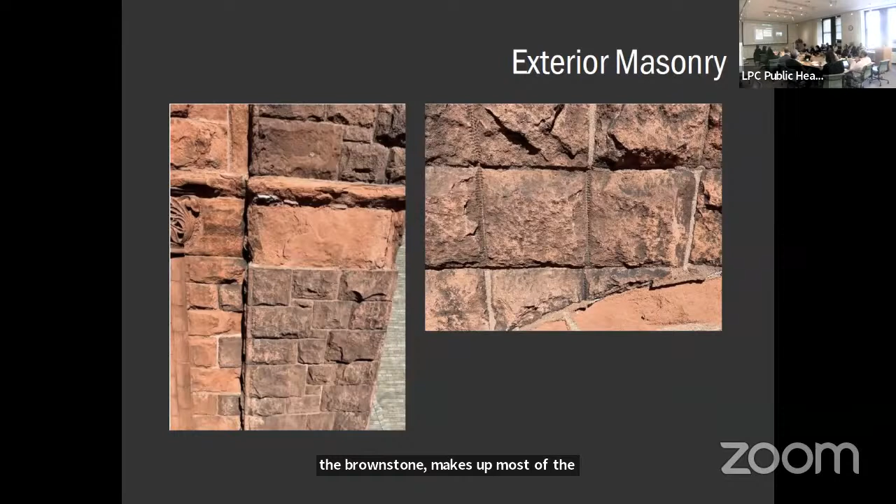The other stone is this redder stone that is used for the carved ornament areas, and it is much softer and has deteriorated quite badly in places. A good way of thinking of this is that the brown stone makes up most of the wall, but the red stone makes up most of the dangerous conditions. Next slide, please.

Thank you. These are pictures from the report by Facade Maintenance and Design, which is a member of the development team, showing a probe at the exterior wall. The Facade MD report states that the brownstone veneer is 4 to 5 inches thick. That's its minimum thickness, it is thicker in places. As you can see in the picture on the right, the stone there is 8 inches thick.

The probes show that there are occasional metal ties between the veneer and the backup. They are not everywhere. But I think it's important to note that there is no evidence and there has been no discussion of separation between the veneer and the backup. In other words, the wall is holding together reasonably well as a whole. What is happening is that the exterior of the brownstone is deteriorating and in some cases breaking off.

Next slide, please. You've seen this picture before, about 5 minutes ago. I want to draw your attention here. We have what's either a very large dormer or a very small cross gable on the south facade, and the triangular pediment portion of that wall is tilted outwards rather noticeably.

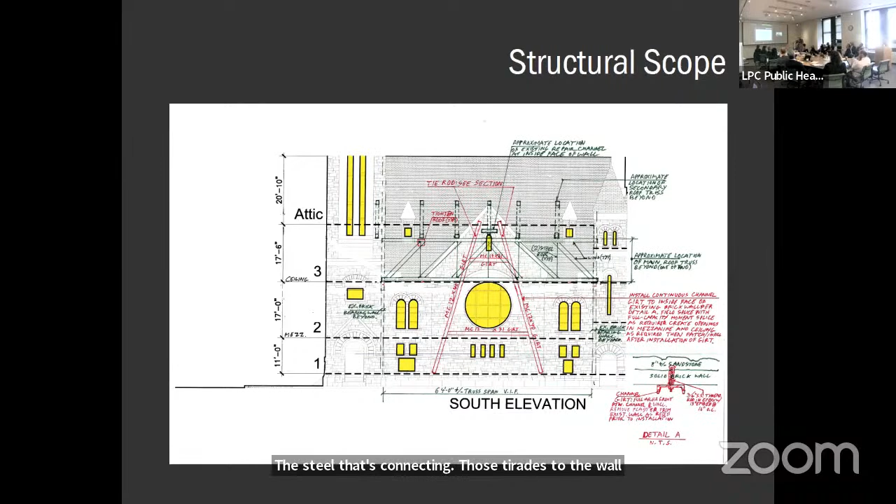Next slide, please. This is a cross section through the church. There's the gable truss, there's the lower truss. We've got tie rods up here and tie rods down here. I just want to make an important point: there's a discussion in the structural report that this wall is being pushed outwards because of the thrust of the main roof. But if you note, the main roof rafters come down at the bottom of that triangle—they can't possibly be exerting force up here.

More importantly, that rafter is supported here, here, and here. You get thrust in a gable roof when the rafters are only supported at a ridge board and at the eave—that's not the case here. There is no outward thrust under gravity load from those rafters. So the explanation for the gable and wall movement is not inherent in the structure of the roof; it's inherent in the lack of ties between the wall and the roof structure.

Just to continue on this for a second: the roof ties are up here, and these girts continue all the way down. The girts are channels laid flat against the wall. They are much less stiff than the wall is, so they are not going to do very much to restrain it. In short, the work below the eave, at what's called level 3 here, is not very effective.

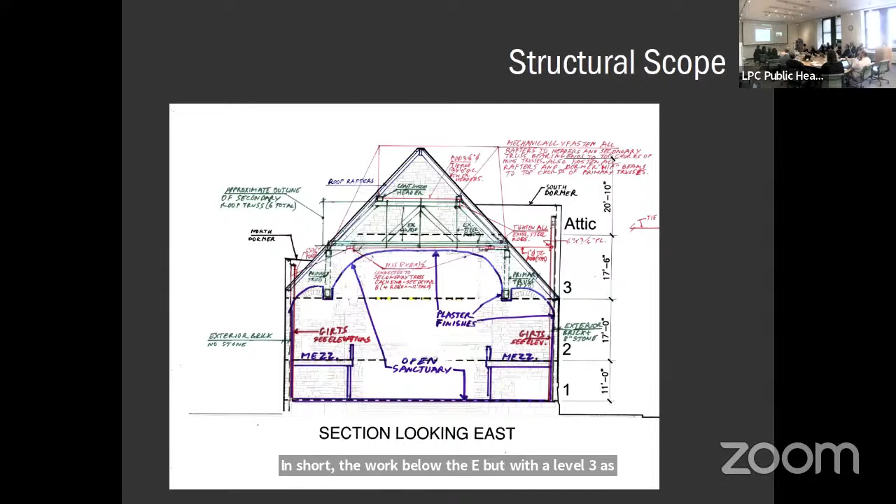Next slide, please. This is a very short summary of the scope of work that was priced, for which there's a long cost estimate. If you count the stones in the cost estimate, it appears all the damaged veneer stones are being replaced entirely. Pins are being put in to tie the veneer back to the brick—twice as frequent as required by code, though not required by code for a new wall, and not required at all in this case unless there is damage, because the building is grandfathered in its current state. If there were separation between the veneer and the backup, they would obviously be called for.

As I've just discussed, we have two sets of steel ties running across the building, including those steel girts that run from the first floor all the way up to the top of the roof. I didn't discuss this in detail, but there is full restoration of all the art glass windows, which is most of the windows in the building. That is the scope of work priced out in the April 2023 documents that I reviewed. Next slide, please.

So what I've done for the alternate scope of work, and I did this specifically to look at the cost, is what work is necessary to make the building safe today and for a 5 to 10 year horizon, knowing that more work will have to be done. If you spend more work today, you will reduce the amount needed in 10 years, but you will not eliminate it. So right now, the question is, how do we make the building safe?

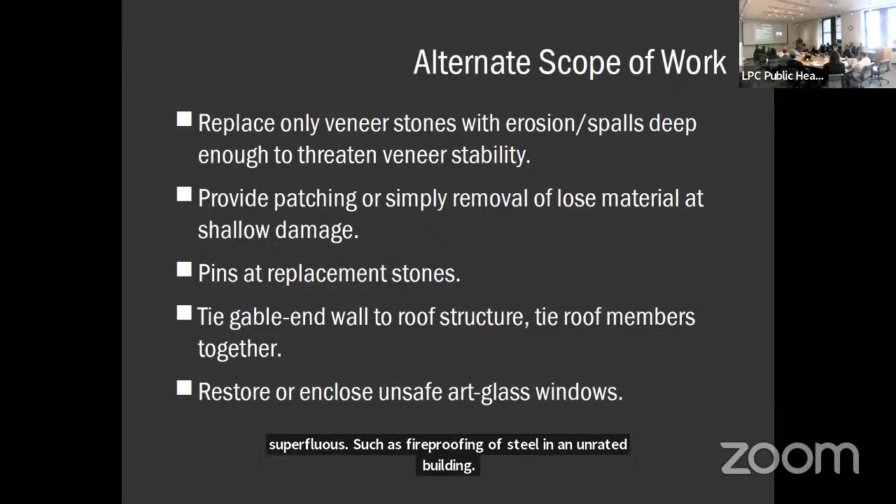In my analysis of the structural work, I kept the scope of work as shown in those 2 sketches a few slides back. I removed items that appear to be superfluous, such as fireproofing of steel in an unrated building. If you were to tie the wall to the roof and tie the wood members of the roof together with light gauge steel connectors that are used in wood construction today, you could eliminate most of the structural work as currently shown. I believe the cost, simply in eliminating the superfluous work in the structural portion, the cost dropped by about 50%. If you were to go to a more carefully designed repair, I believe you could reduce that by another 50%.

Looking at the report on the art glass, most of the windows are not unsafe. However, the scope that was priced was full restoration of all of them, including double glazing. If you were to change that to simply restoring or putting a storm window in front of the windows that are currently unsafe, you could again greatly reduce that scope.

One last comment about the existing Department of Buildings violations. They do not say this stone is unsafe. DOB violations don't work that way, as I suspect you all know. So part of doing repair in a building like this is to say to the building department, here are the unsafe conditions we intend to address, and here is our plan for future work, rather than here's a plan to do everything today. Thank you.

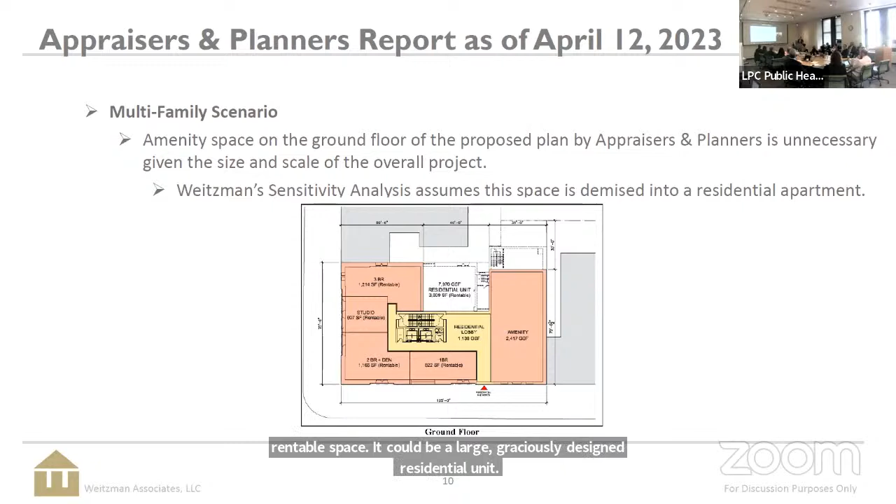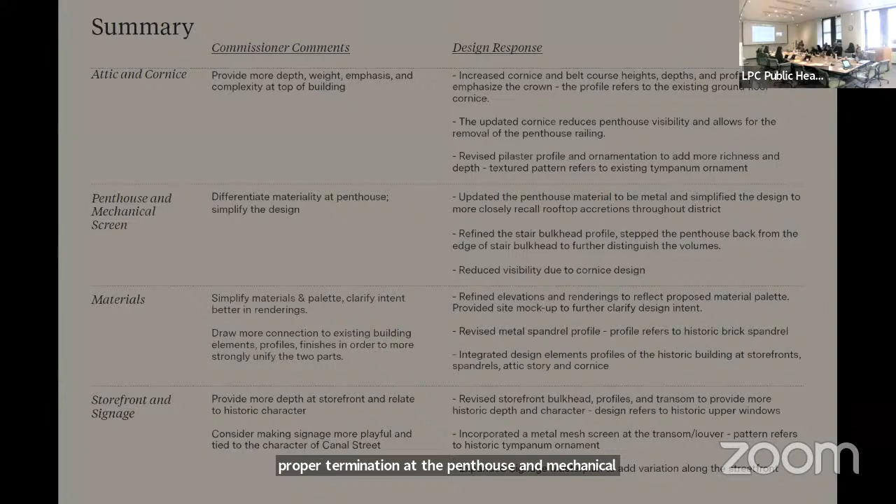So here we have just a summary of your comments that we heard at the hearing. We also have our specific design responses. But in general, what we're talking about today are the attic and cornice level. You thought there was a need for more depth and articulation and emphasis of the crown to give it a proper termination. At the penthouse and mechanical screen, you wanted the design to be differentiated from the base building and to simplify the design more in keeping with typical rooftop accretions in the district.

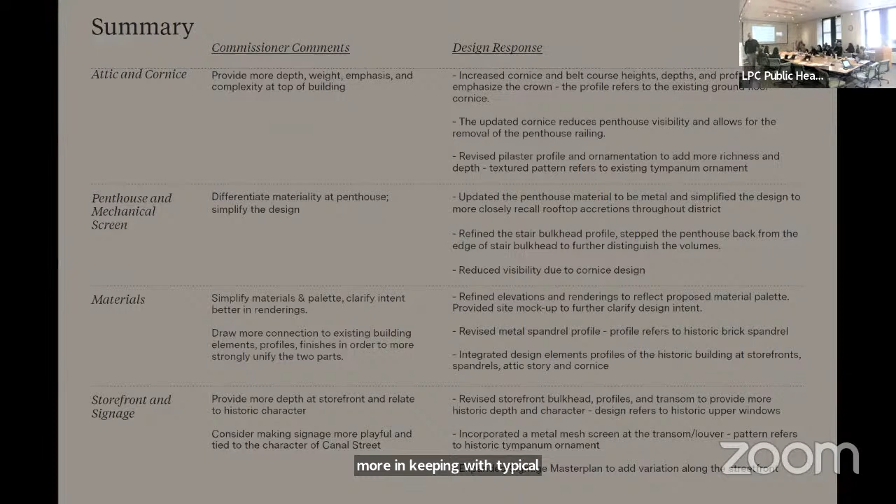In terms of materials, you asked that we simplify the palette and make more of a connection to the historic building itself in profiles, materials, and overall palette to unify the two parts. And then finally, in terms of signage and the storefront, you wanted something that related in terms of storefront infill that resonated more with the historic character of the building. And then also in terms of signage, something perhaps a bit more playful and reflective of the character of Canal Street. We've of course responded in words, but maybe the best place to see it is in elevation.

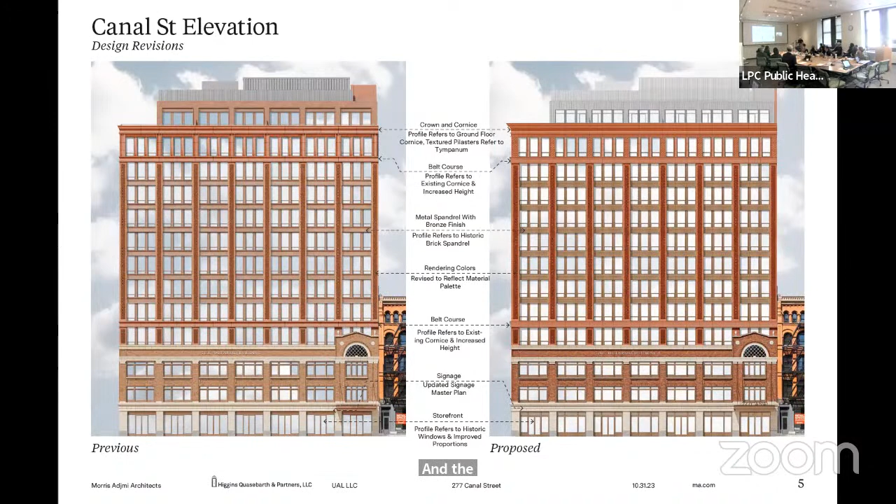The storefront and the signage was also changed and enhanced. So if we start here, this is a Canal Street elevation.

You can see that the cornice was almost doubled in size. It went from about 3'10" to 6'7", I believe. That encompassed the handrail with further articulation, and it also extends 3 feet from the face of the building. Before it was about a foot. And the belt course below the attic story extends a foot, which was what the previous cornice extended.

One thing I should have pointed out is that there's an existing arched opening with a lattice pattern, the diamond pattern that you see in the tympanum on Canal Street. We used that originally to inspire the sawtooth brick pattern, but that's extended to the terracotta pilasters at the attic story as well, and that really ties all of those elements together.

Also, just want to note that the spandrel panels, which were sort of a channel, more industrial, now directly relate to the spandrel panels in brick, although in metal, relate to the proportions and the size of the spandrel panels on the existing building in brick.

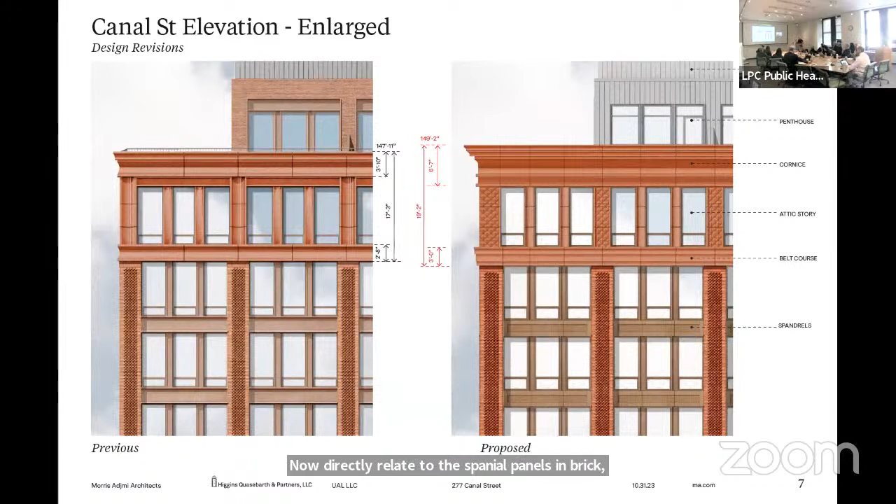Next slide, please. Here, just more detail on the drawings. You can see the cornice extending 3 feet from the face of the building, and the previous was a foot, and also the overall height was just under 6'7". And then the belt course, we added 6 inches to that, and also increased the depth of that.

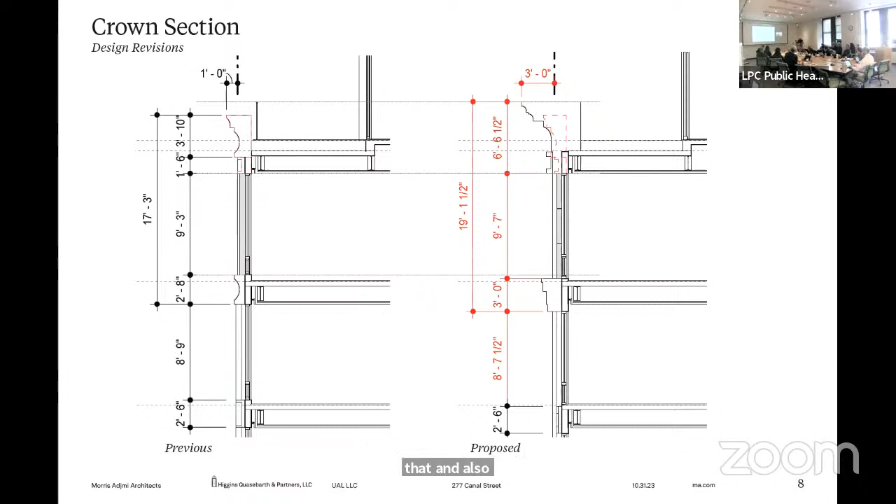And so here from the corner, you can really see the effect of the overall attic, specifically how it's really the appropriate size now for the entire ensemble of components and the termination for the building. Additionally, it helps to shield some of the visibility of the penthouse, depending on the position. And you see all the elements here, the nail head or diamond pattern on the terracotta pilasters at the attic story, as well as the sawtooth brick pattern below.

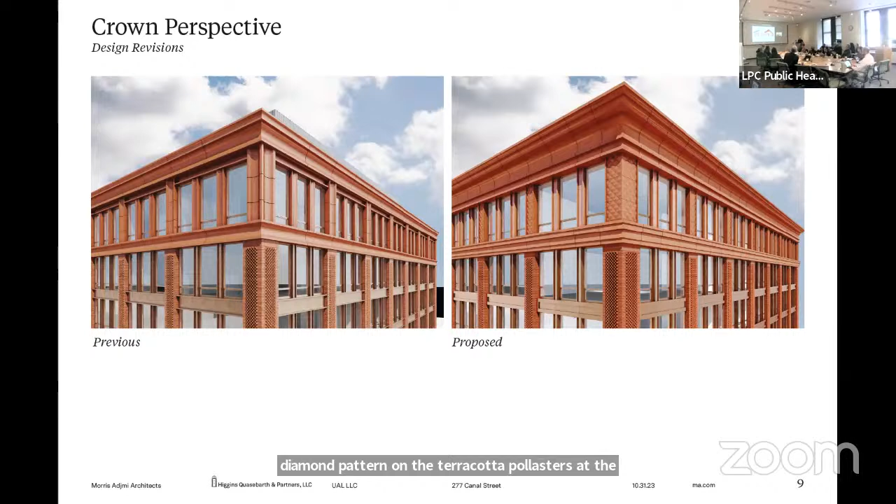Next slide, please. Here, just more dimensions. I don't think we need to go through those, but on the mechanical screen, we're asked to look at reducing and simplifying the materials, to make it more in keeping with some of the rooftop accretions that you see in the district and the neighborhood in general, which we've done.

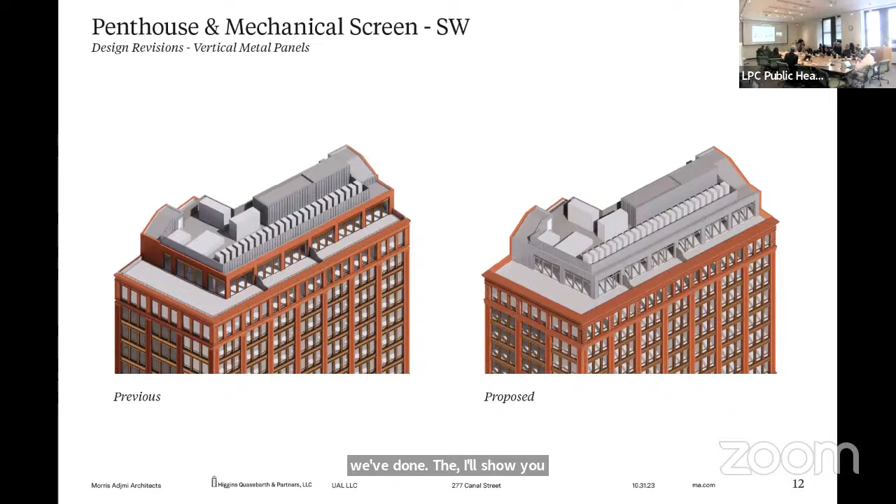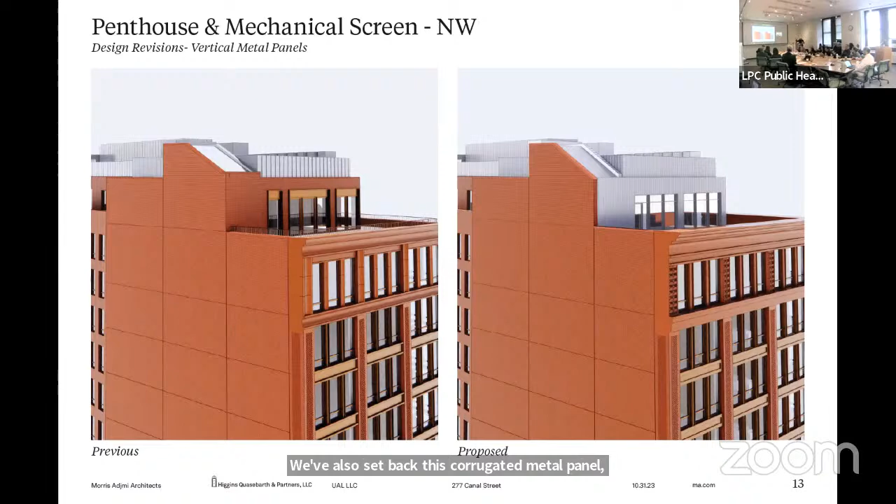I'll show you some of the detailing in the next slides. So here you can see the brick wall extends as many of the existing buildings in the district. We've also set back this corrugated metal panel, simplified some of the detailing on the top of the building as well, and the fenestration panel pattern is also simplified.

And you see the end wall there extending up and the material change. I think this is also a good view just to see the effect of the attic story, the enhancement of the cornice and the belt course, as well as just the taller story there really helps terminate the building. And you'll see it in the next image.

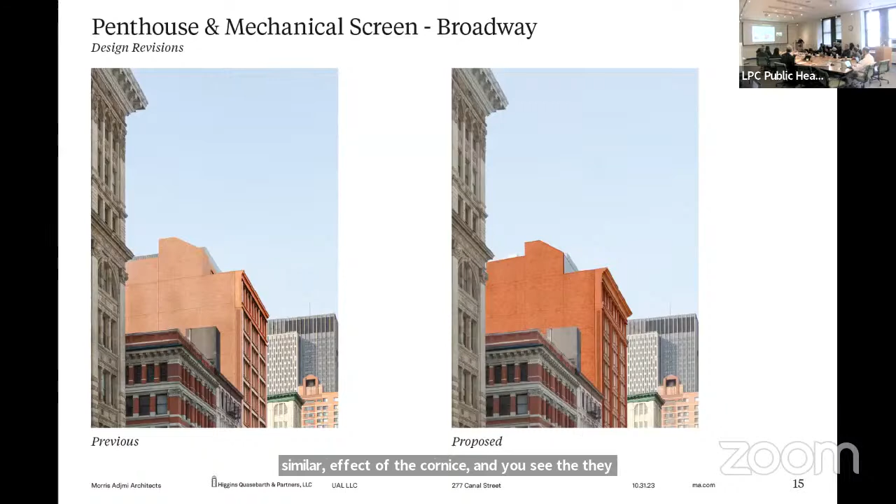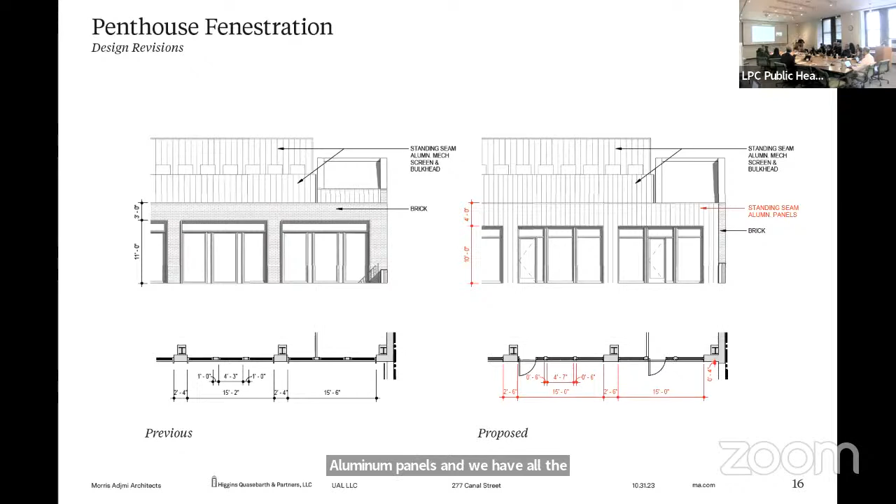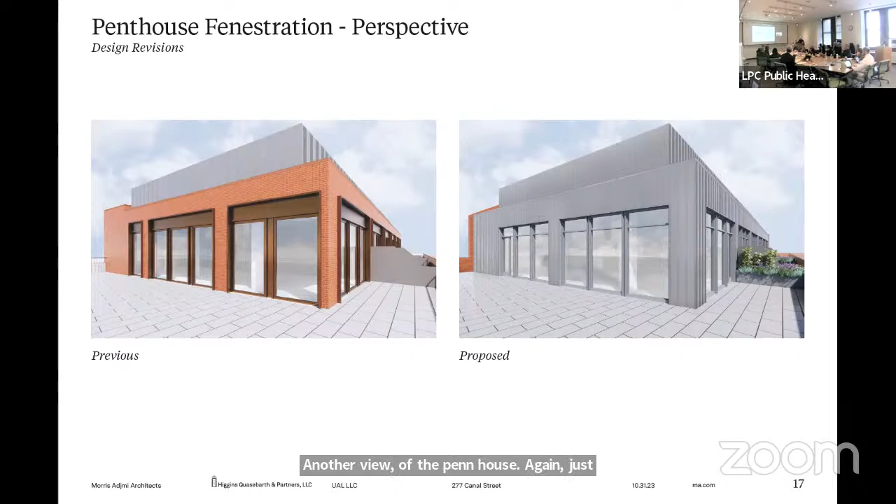Another view of the penthouse, again just simplifying the details there. In terms of the materials, we were asked to look at the brick to tie it in to the existing brick pattern.

We also did a mock-up on site. In the previously proposed material for the brick, it was more monochromatic. We've found a brick that has a little bit of a range, but we want that still to read as monolithic material so that the pattern of the brick and the detailing of the elements are more pronounced with the shadow. And that's the existing on the left.

And then the next slide shows all the materials for the existing building on the left and the proposed on the right, which is the brick with a slight variation, the terracotta and the bronze toned aluminum with the lighter aluminum for the penthouse.

Here's a mock-up. It was a little difficult to get a good shot of this, but the brick really drew on the colors, with the exception of the black, the range of reds that you see on the existing building. And we've updated the renderings to show that. Next, the storefront.

We were asked to enhance the details and look at the bulkhead, and we've done that. We've changed the profiles of the storefront. We introduced a mesh screen to hide the louver behind it, which recalls the diamond pattern you see in the lattice on the arched opening above. We have a few additional slides of the storefront.

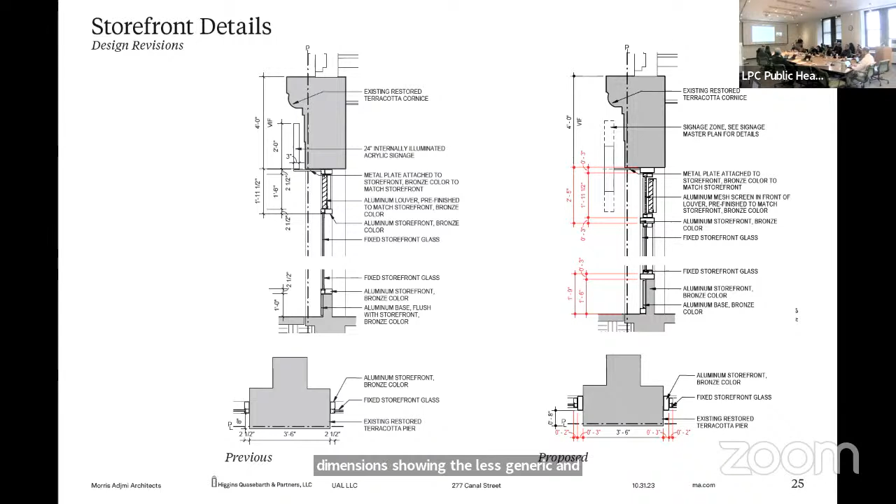Here are some of the dimensions showing the less generic and more nuanced profiles for the storefront, and a render showing the effect of those changes.

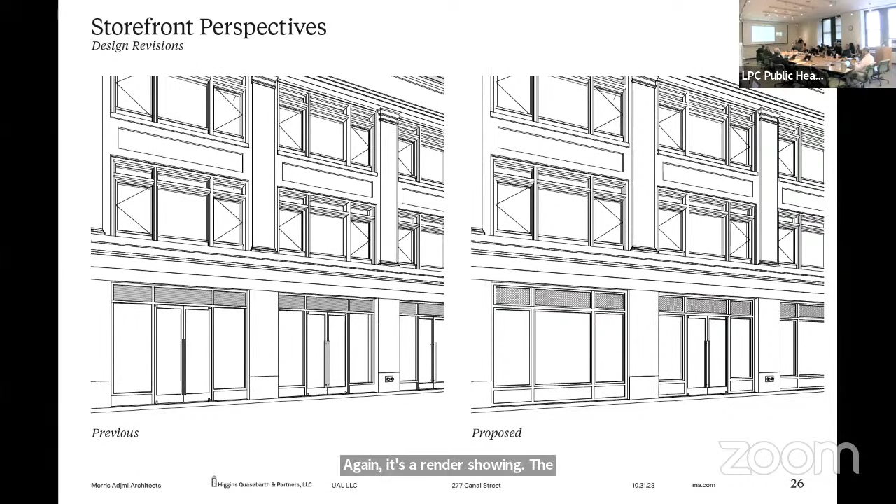Aaron, do you want to talk about the signage? Next, please. Yeah, thank you.

As I mentioned, when we first presented the project to you in June, we had a rather typical or standard storefront signage program, and your comments were that you wanted something more reflective of the context. So we have worked hard to try to land on something - it's very hard to codify variety. We'll run through this.

We see a sort of layered approach, both at the storefront and at the building scale, advertising to the pedestrian level but also the vehicular level. As we know, Canal Street is a major interborough, interstate thoroughfare, so we get lots of vehicular and pedestrian traffic, and we'll see some of that in this context. Next slide.

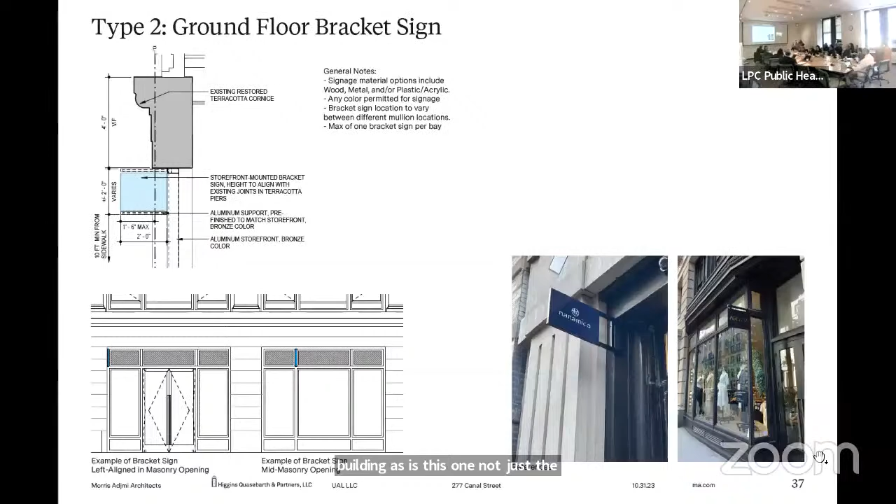Interior storefront signage. This is illuminated or non-illuminated within any range behind the window, and that would comply with zoning, which allows for up to 8 square feet per establishment and up to 3 signs maximum. In addition to that, are LED screens.

The LED screens follow the new staff rules—they can occupy up to 50% of the glazing area. They need to be set back a minimum of 18 inches, and they can't occupy more than 75% of the width of the window. Next slide.

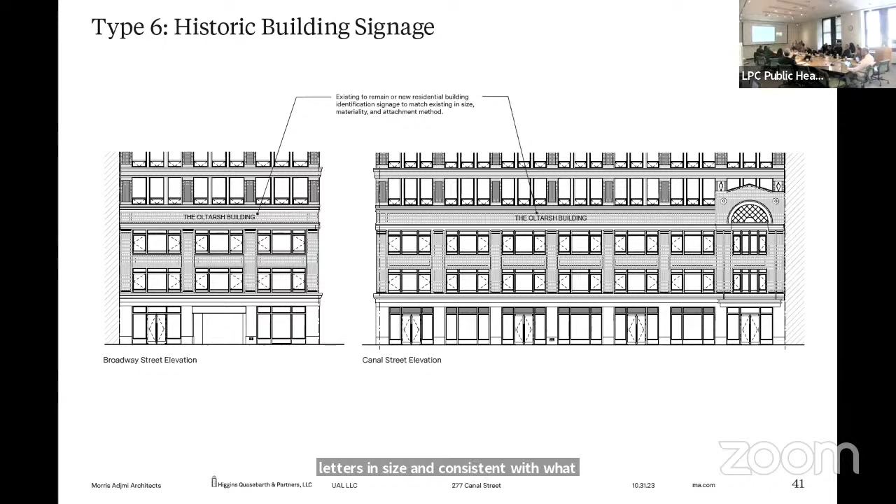Next slide. Oh good, we're done with signage. So we'll step back and just take a look at the building in context. I think these are the comparative elevations, which we've seen a few times already and gone through in detail.

Next slide. Here is the Broadway elevation. So all of those changes are consistent all the way around the building.

And I think Morris mentioned this, but this is where you start to really perceive the depth and articulation of the crown of the building, and feel how much more resonant it is with the depth of the historic facades. Next slide.

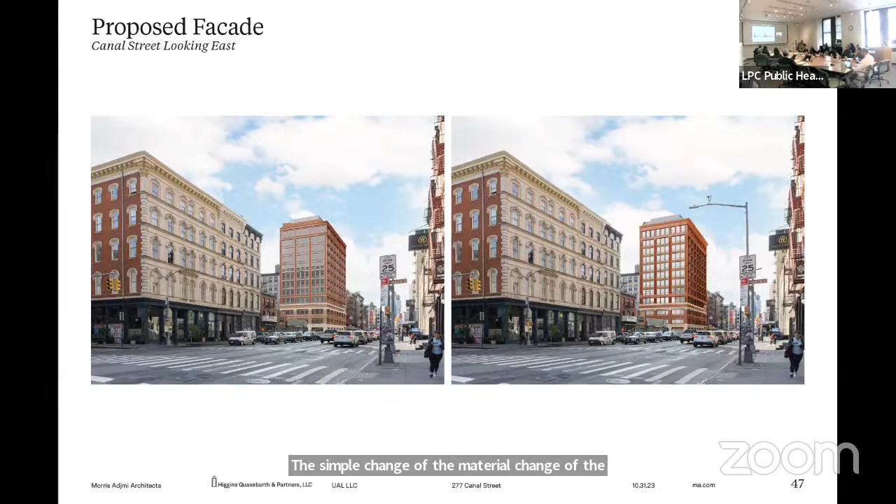This one, this is my favorite one. The simple change of the material change of the penthouse is so impactful here because you get the proper termination to the building. Here you see that the increase in the cornice height and profile really caps the building, and then allows the penthouse to recede in the distance.

And again, all the depth and articulation on the facades that you see as you're looking at the oblique. Next slide.

Thank you very much. Questions, commissioners? All right, I'm not seeing, yes, Vice Chair Bland. Unless I've gotten amnesia, I don't think I was here for the. You were not here. Okay, good, sure.

Thank you, very, very reassuring. My question is a very vague, broad one, and it's directed to Morris. But I noticed that it was also in the directive from the commission back to you at the end of the first one. Something about the whimsy, or I've forgotten the word, on Canal. This building is so un-Morris-like in that it doesn't bring us what you've accustomed us to expect from you, which is a level of whimsy or something that takes it away from the almost generic quality. Am I missing something in the details that you're going to surprise us with, or is this as generic as it looks?

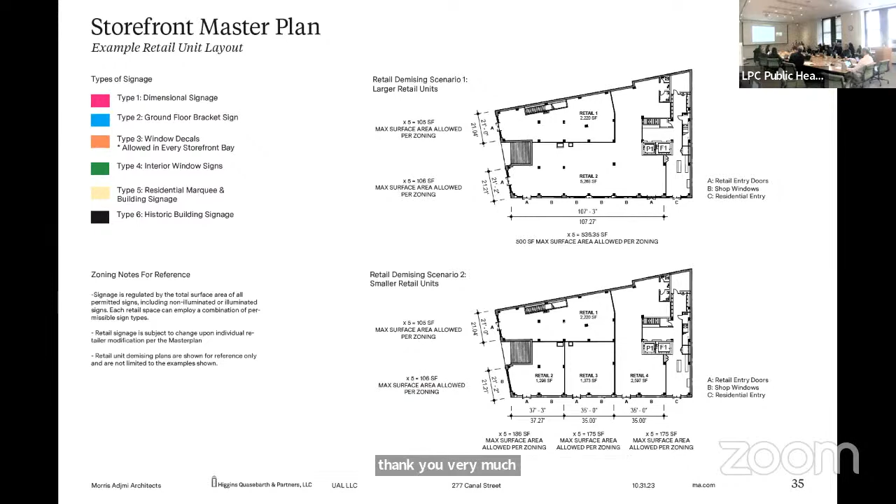Yeah, I was just looking at the rendering comparison from the previous to the proposed, and maybe I missed this, but the color of the brick is significantly different in your renderings - even on the existing building. I think we tried to more accurately reflect the colors of the materials, and it's coming up a little more saturated than when we actually did it.

So it's not that you're changing the brick on the existing facade? We're just cleaning the brick and repointing, not changing it, and it's reading a little redder than it is. At the same time, the one on the left reads a little too pale. Right, exactly. On this screen it's closer to the way it looks, but here it's reading a little off. Maybe we could flip to the sample to show the clean brick detail.

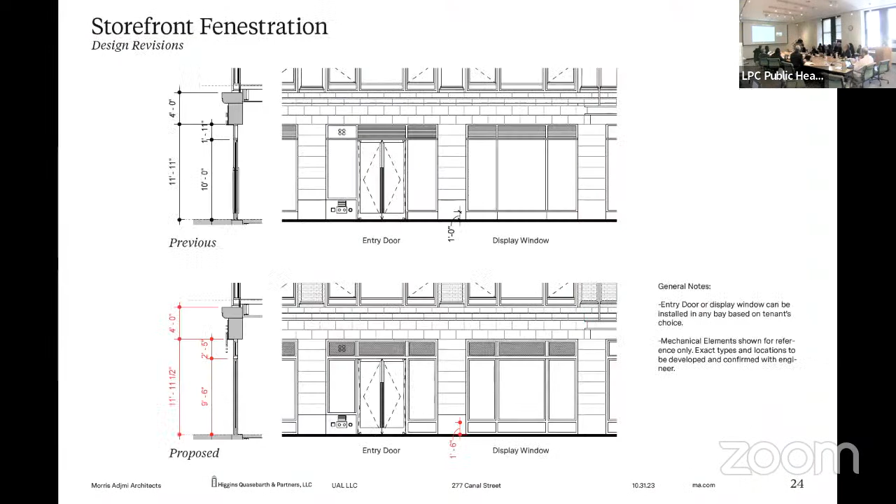Yeah, I was going to ask, did you clean a brick to look at it? We did. And does that match the sample on the table down there? The clean brick - this brick, that's the proposed brick, right, and there's a photograph. I think it's the next slide, right? Yeah.

And so we consciously didn't include the grays because we wanted to have that contrast, but we did draw on the range of reds in the base in the existing building. And this is, I would say, our intention. I think there needs to be a little bit more studying of the actual brick selection.

Can I ask something about the design intent? I think I agree with Commissioner Jefferson's comment that ultimately you've designed a very handsome, detailed facade, and it is a good fabric building - I think it's a handsome fabric building. Is it that the impact really will be the addition over the existing?

Yes. And from here, it looks like your intent is to make the addition feel more monolithic. Is that correct? Yes, yes. And that's the change in mortar that makes it more monolithic and less of a pattern. Right.

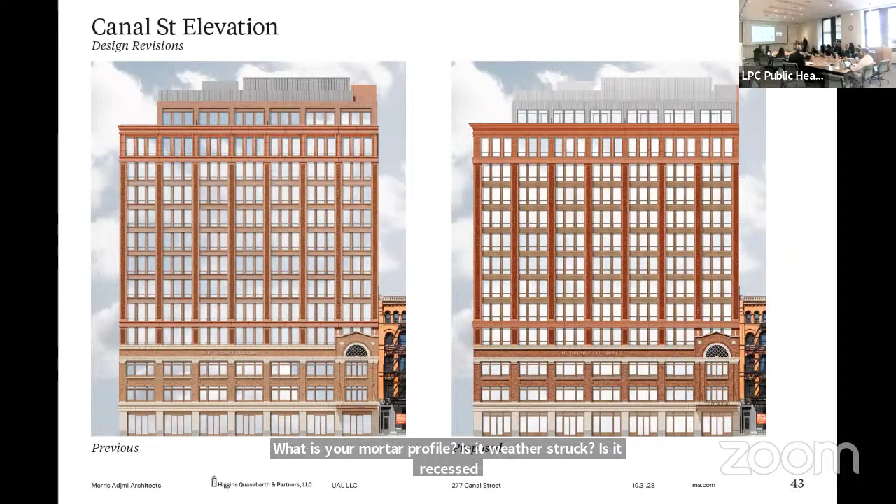Do you want the shadow? I think the shadow would help actually. Yeah, I think so.

And then the last question is about the signage. Essentially what you're proposing is expanding the possibilities of a tenant to put signage above and beyond the staff approval standards. That's correct, I think we were asked to be more exuberant with the signage at the last meeting. That was okay.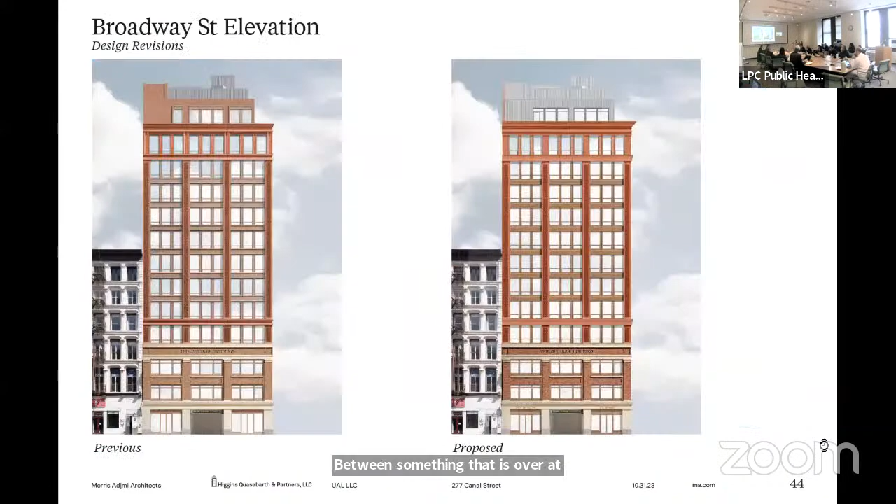What I do worry about, if you go back to page 21, the original mock-up is, as Morris said, on the line between something that is overtly intending to contrast and something that is overtly intending to extend the language of the building below it. And I guess I'm more of an absolutist than he is, but that's his right, and he's not wrong to be shooting for that target.

I worry very much that this particular palette is rather different from the renderings, in that the new palette, because of the mortar, not because of the brick color, I don't think, but because of the mortar and because of the trim colors, is going to feel like the intention was to do an additive building, where it's all kind of, the moldings are traditional, everything lines up, the fenestration. It just, as a mass and as a bulk and as a squinted design, as Morris said, from a distance, it really does feel like a single composition.

I just worry that when you get closer, it won't start to have the subtleties that he speaks about, but will feel like they swung and they missed on a match. That doesn't make me feel that it's inappropriate. I'm willing to give it a shot.

It's a big risk, but the safe solution would have been to just make the terracotta match the terracotta below, and to kind of seek to really blend it, do something with the grout that was more in line with the grout below. Because I think when you look at the building from even a reasonable distance, you're going to really see the variation in the grout considerably, and it's going to kind of change the overall feel of the building. I'm concerned about it, but I would still view it as appropriate.

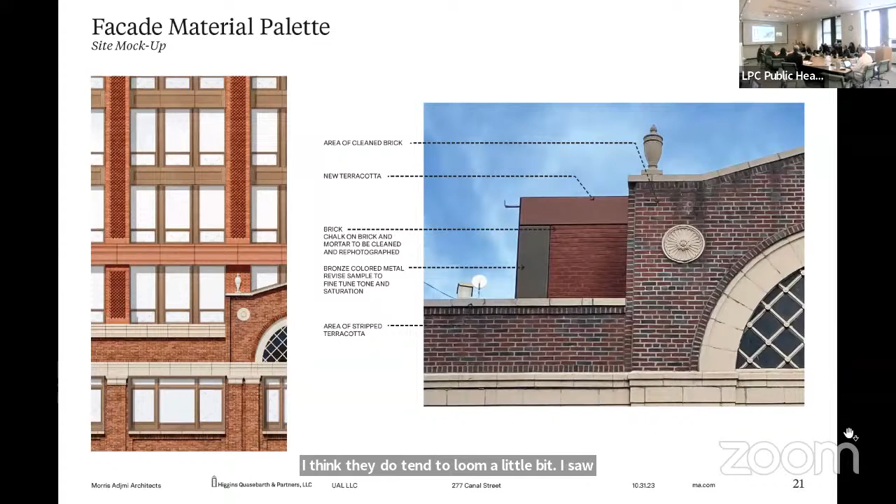All right, Commissioner Holford Smith, I think you also had very much the same comments, really talked about the attic floor being stronger and being a little more creative on the signage. You suggested the storefronts have stronger transoms and bulkheads, which they've incorporated. So how are your thoughts now?

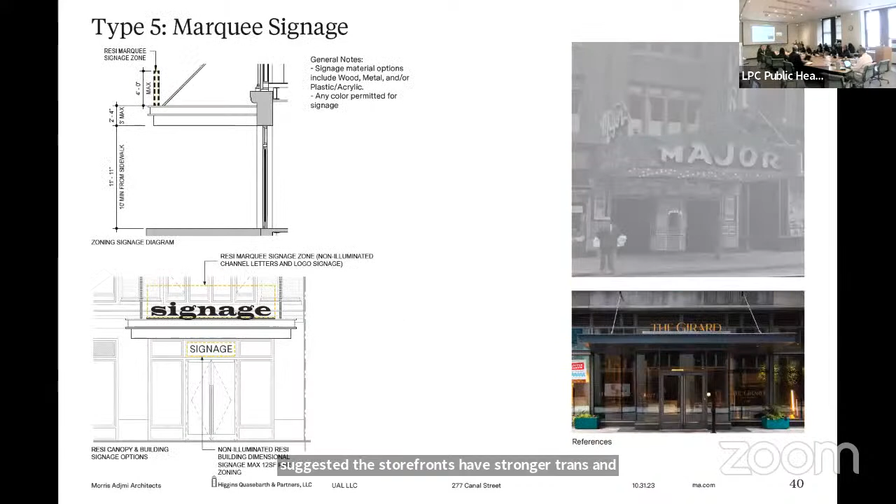I think all the changes are very positive. I think it's a much improved building. It was nice before, but I think it's much better now. I am persuaded by the signage that I think it'll self-regulate. I do share some of Michael's concern about the color of the brick and the monolithic aspect of it.

So I would just encourage them to keep looking at the brick and the mortar and maybe do some more mock-ups, because when you look at the original building, it goes a little more black and sort of dark maroon versus the sort of terracotta red of the brick. And as Michael was saying, you don't want to make it look like a mistake. So, either a common brick or using the same brick with a light mortar for the back facades, I think would be more appropriate.

Okay, great, thank you. All right, Commissioner Jefferson, I think you also were comfortable with the height. You specifically talked about simplifying the penthouse last time. I'm comfortable with all of it.

Okay, thank you. And Commissioner Master, you were largely supportive last time, including the signage on Canal Street. How are you feeling now? So I like the proposal. I like the cornice. I like the red.

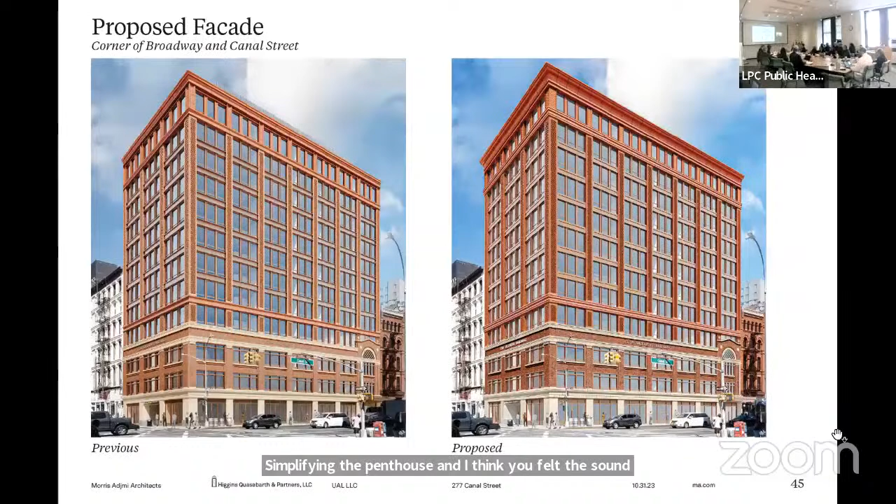Could we just go back to the other view of the building at the intersection? I'm sorry, Commissioner Lufty, could you speak into your mic? I just wanted to go back to the prior view where we were. Here? No, it was really at its full intersection. That's it. Thank you.

Because I want to just emphasize something I talked about a little bit last time, and that is, I was very supportive of the project then and I continue to be. But I want to first address the fact that I really think this is a very important nexus, as we discussed last time, and it's important that the building anchors this intersection, and I think it has very successfully done that in a way that also enables it to embrace the height that it has.

And I think it also marries from an architectural standpoint, not only what's going on Canal, but also what's coming south. So I appreciate that, and I appreciate, as part of that, the desire to look at what was pre-existing.

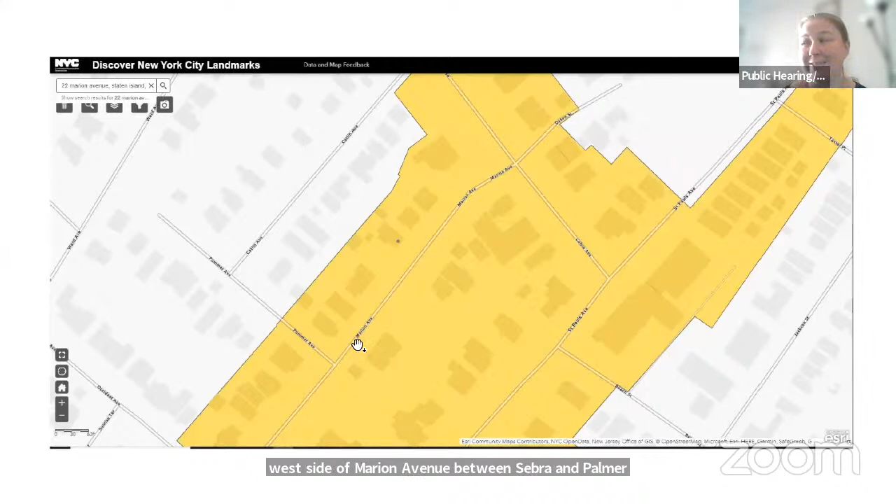Good morning, good afternoon, Commissioners. Abby Hurlbut, Preservation Staff. This application is for work at 22 Marion Avenue, located on the west side of Marion Avenue between Cebra and Palmer Avenues in the St. Paul's Avenue, Stapleton Heights Historic District in Staten Island. I'm going to briefly describe the proposal before handing it off to the homeowners to discuss in further detail.

The designation report describes this building as a Greek Revival style house with later alterations that was actually moved to this site circa 1886 to 87, during the rapid growth of the district at that time. It's believed that this Queen Anne style porch was likely added at that time the house was moved.

The proposal before you today is to install fiber cement board siding, also known as Hardie board, on all facades over the existing wood siding, and replace the wood trim with composite trim. The proposal consists of installing plywood sheathing on top of the existing wood siding to remain, followed by an insulation wrap and any required flashing at the openings, and finally the Hardie board lap siding. As a result, the plane of the new siding will be proud of the existing siding by just shy of 1 inch.

The window casings and lintels are proposed to be the composite AZEK material, while the historic wood fascia, brackets at the cornice at the top of the building, as well as the porch, will be repaired and retained in their existing locations. Now the homeowners are here to take you through the existing conditions and discuss the proposal in further detail. Make sure you state your name for the record, Tyla.

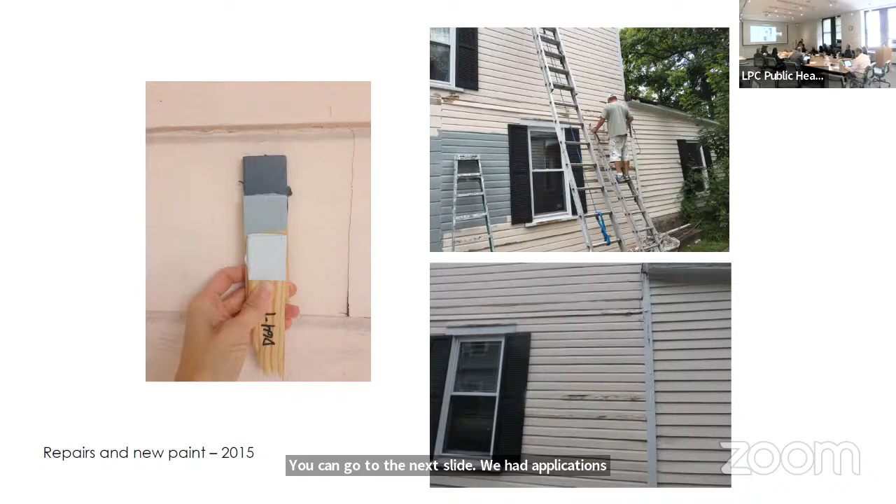We had applications submitted to paint and make some repairs in 2015, update the color, sand and stain our front porch, which we did a lot ourselves, which was fun. We put in an application and we're permitted for the new front door, which we kind of love.

And we're surviving here. I had another baby in the meantime. And just started dealing with interior issues and water issues. We kind of had a million different contractors come through in the past 9 years. Everybody has ideas for what to do. Everyone wants so much money. And we kind of were thinking, how do we do this? How do we maintain it? What do we do for the fixes?

We are dealing with a lot of different sides of different patches over the years, things that have been done well, things that haven't been done so well, lots of cracks and seaming. So what we were trying to address with the painting and the patching and repairing didn't really last as long as we had hoped. We were told we'd probably get 7 to 10 years out of painting the house. We needed to paint it within 5 years again. And everything is now 15 to 20% more, which is putting us in the spot where we need to have a more permanent fix.

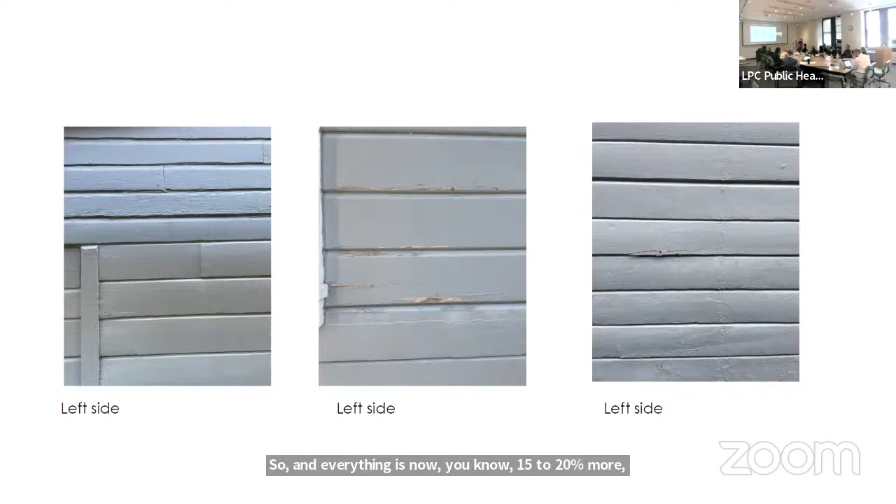So this is just a little bit of the things we're dealing with on the house. A lot of the wood is deteriorated, not all of it, some of it looks good, some of it needs help. There's tons of caulk and epoxy and everything on it that we could come up with and have contractors come up with to help us live in it where we don't have to make this massive change yet.

So we've sort of been eking that out along the way. We have been dealing with water infiltration that has been almost overwhelming. We don't know anybody on our block that gets water like we do. We speak to everybody. Anytime someone has a contractor on the street, we run and get their info, and we have people come over.

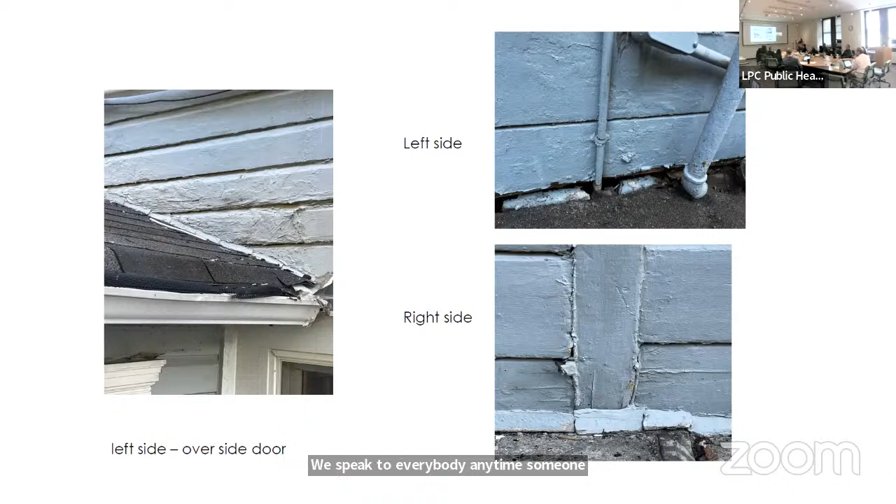They tell us, you have to do this, you have to do that, you need to do this. We get quotes that are way out of our price point for what we could possibly afford to do. So we've been thinking, okay, let's save up money, let's get this done, let's figure out how to do it.

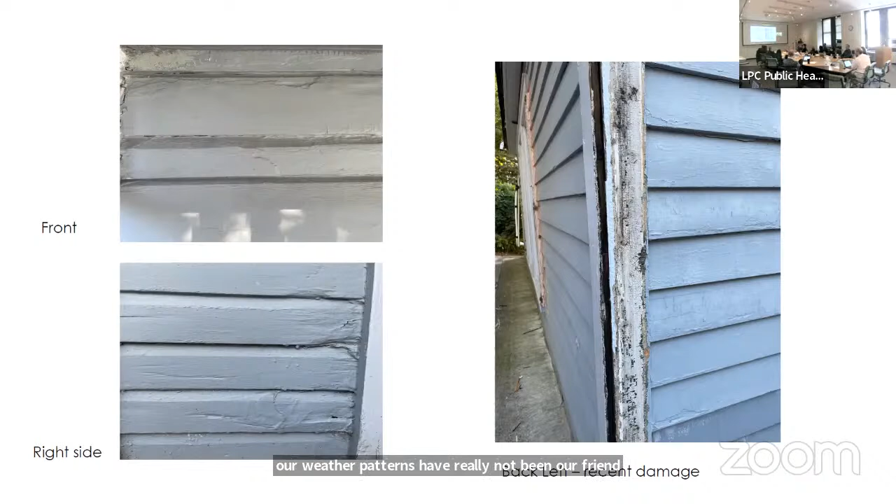The changes in our weather patterns have really not been our friend. We're getting these storms, like 10-year storms, 50-year storms, 100-year storms, maybe once a year. We had terrible rains in July that caused a lot of deterioration on the inside.

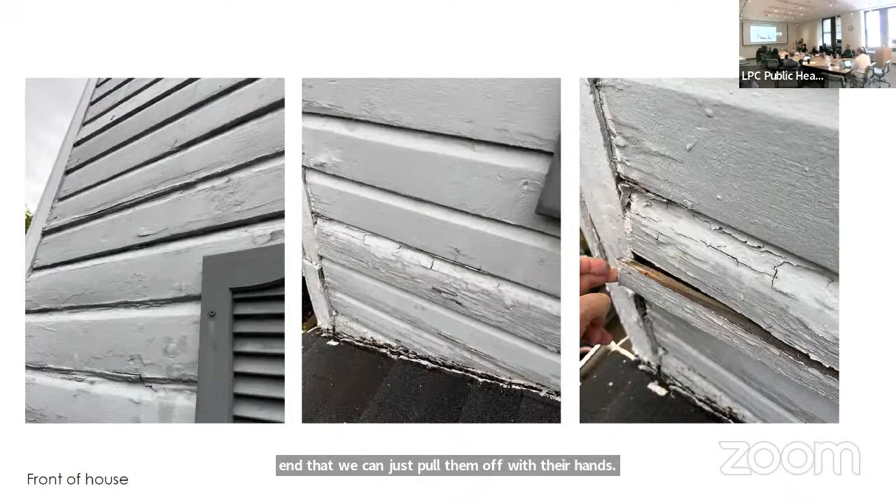We've had some issues with the September storm that made some of these boards so soggy and then dried out at the end that we can just pull them off with our hands. And the water coming in is 100 times worse than what it looks like on the outside.

So we're just sort of at the end of what we're able to figure out for patching and repairing. We've put several insurance claims on, and we're told by our agent that if we put in one more claim, we'll likely be dropped. So that's causing a little bit of a panic for us going into winter, wondering what this is going to be like, what we're going to do.

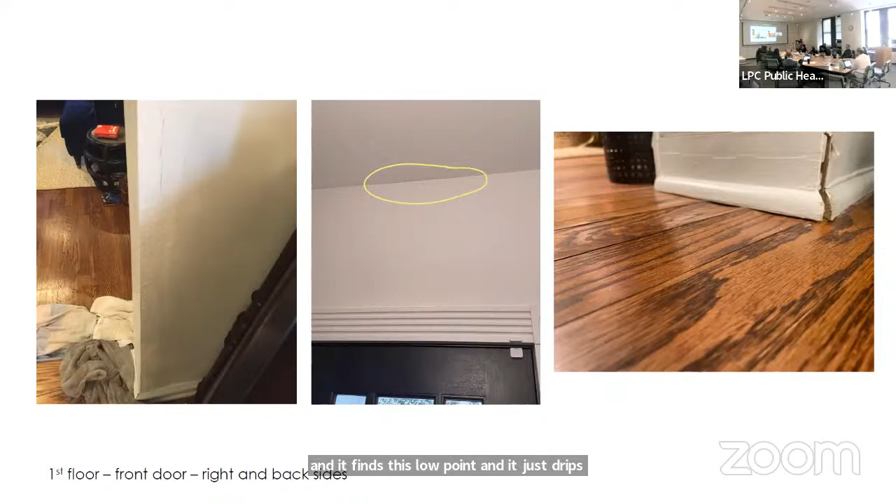This slide all the way on the left, I've rebuilt it, literally gone to Home Depot and found the little metal edge and figured out sanding, plastering, and painting 4 times in 9 years. I don't even want to do it anymore. It just looks like that because I almost refuse.

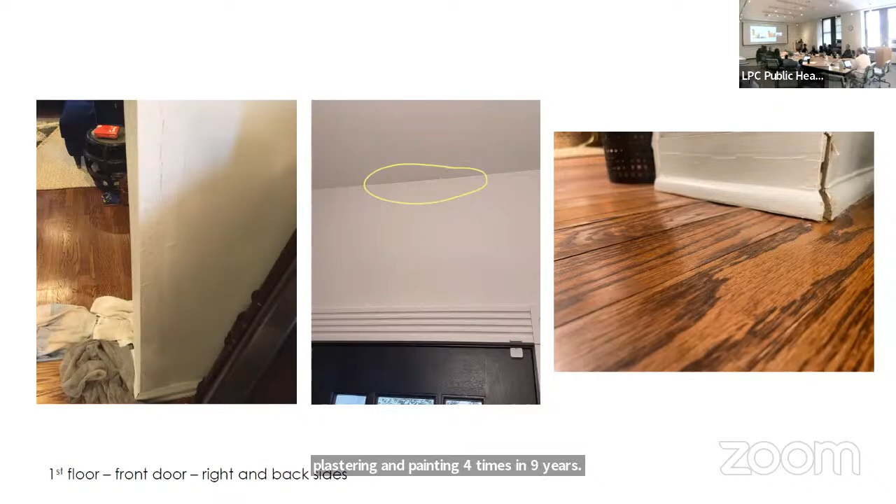We get wood floor damage. We'll go away for a night or 2, and then there's a puddle on the floor, and that's what the wood floor looks like. No one wants to come in and fix 4 boards, they want to do your whole floor. So unfortunately, we just kind of leave it like this.

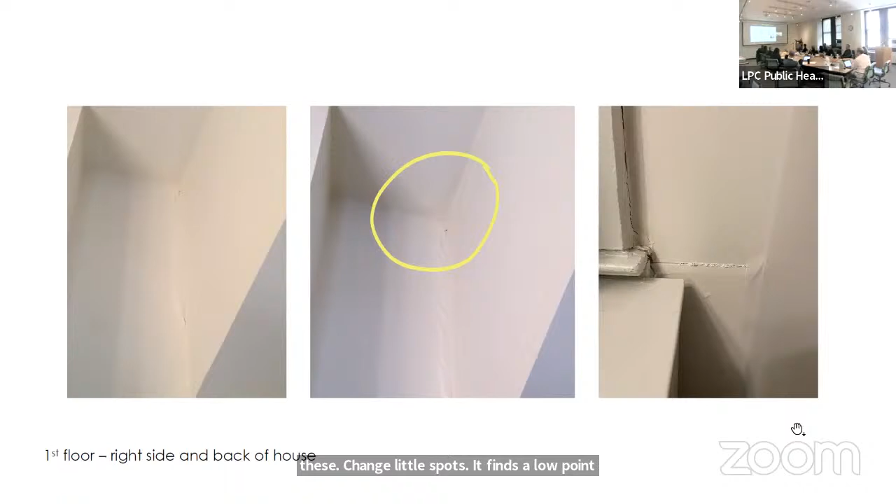These are going to get kind of embarrassing, I think. More water just kind of finding its way, leaking from these strange little spots. It finds a low point, it bubbles all the plaster, the paint off, and then it comes in and it's all over the house.

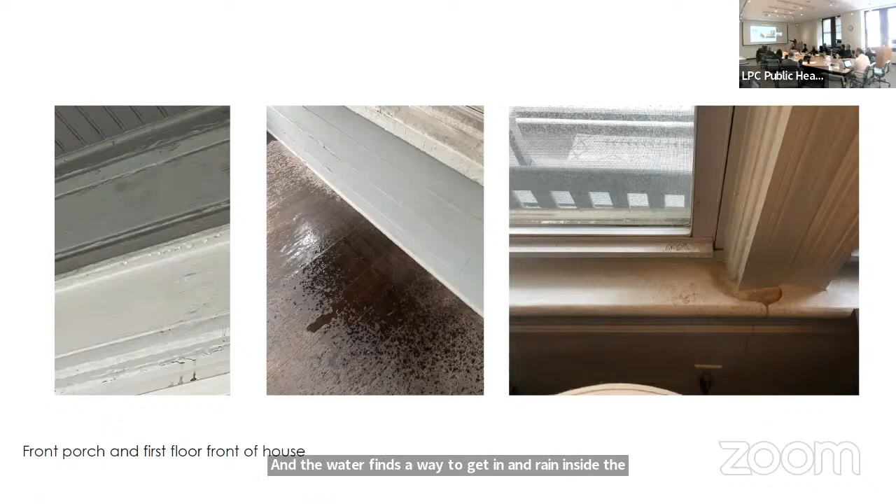This is the porch, which is amazing to me. We have a full covered porch, and the water finds a way to get in and rain inside the porch. And then eventually it comes through that window and ends up inside our home. We see it, or we don't see it until it looks like that, or there's damage to the floor. We have bags of old towels, and my kids run around and we put towels everywhere.

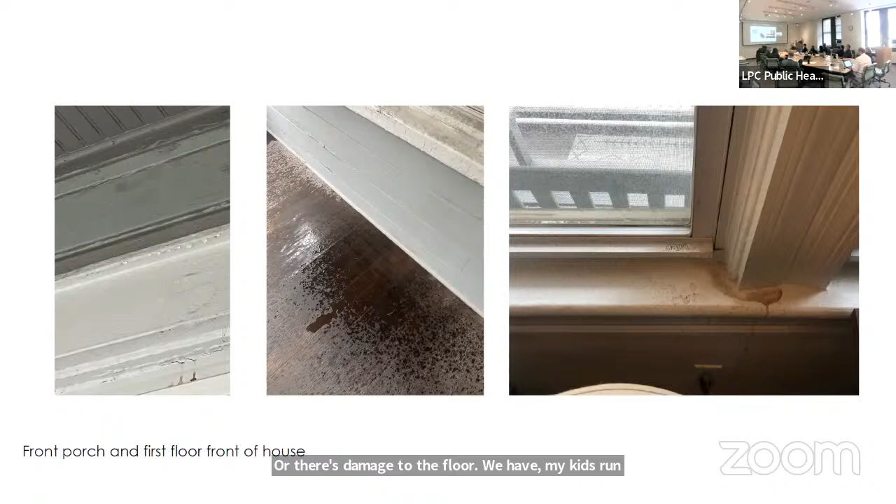And we've kind of become connoisseurs of water drip color, telling you if it's light colored water, it probably came from right there. This one came from far away, probably the 3rd floor, because it's so gross. It's not funny, but it's our life, right? This is what we're dealing with.

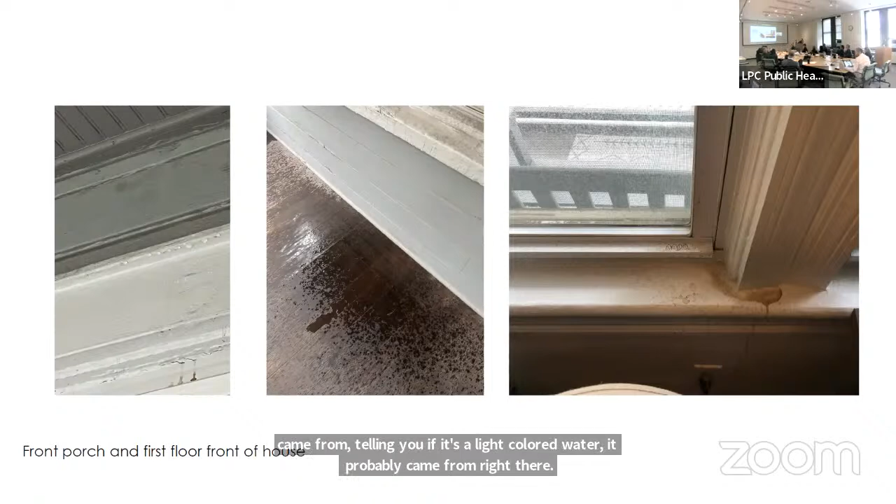So this is our method for trying not to create more damage to our wood floors. I rip up pieces of dish towel and use a butter knife and shove them in the cracks so that the water doesn't come across the whole floor, and we're not throwing away furniture or sending rugs out to be cleaned.

This is the front of the house, which seems to get a lot of the brunt of the rain and storms on the east side, which is the front, and the north side, the right side of the house. I guess that's just where we are on the map, and that's where all the rain and wind comes and just pummels us.

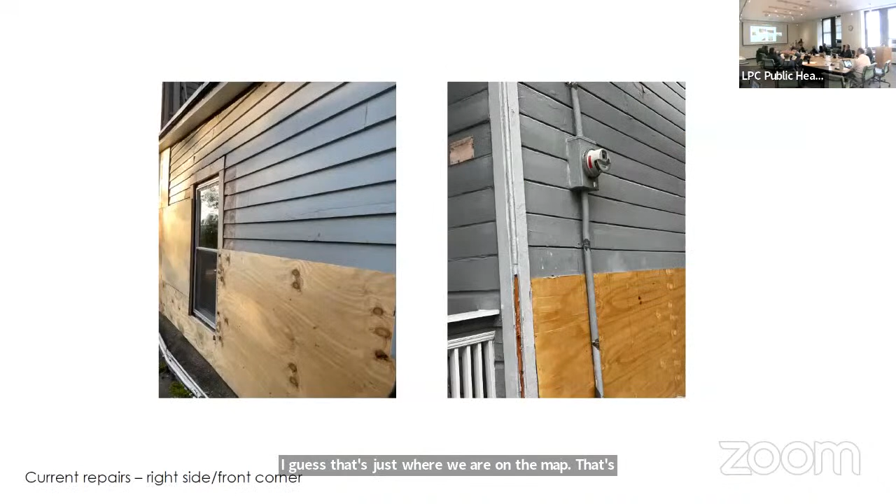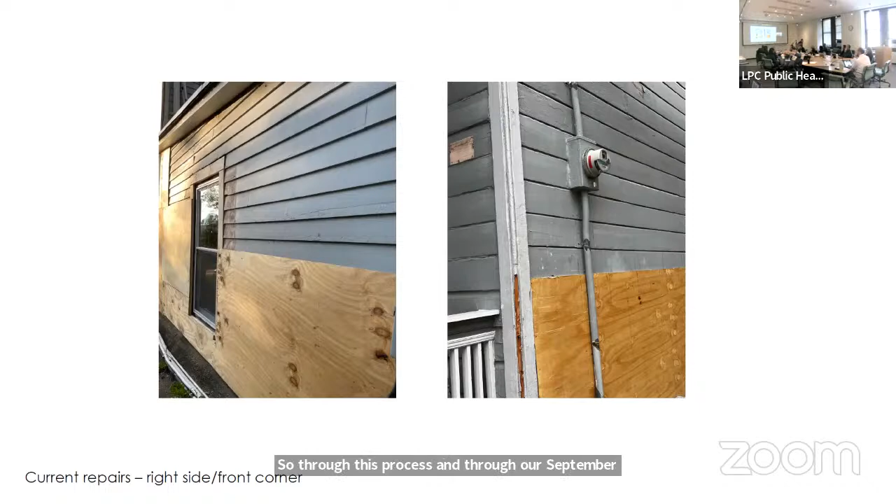Next slide. Through this process and our September repairs, which were pretty disastrous inside the house, we had to replace a bunch of sheetrock. We had boards we could just pull off on our own. We met a great contractor who's really been like an angel to us. He understands our budget constraints, knows where we need to be, and is really trying to help us figure out how to get there.

We uncovered some really upsetting issues during these last repairs, when we were putting sheetrock on the inside and pulling these boards off. We realized now that there's no plywood on the house and there's hardly any insulation left.

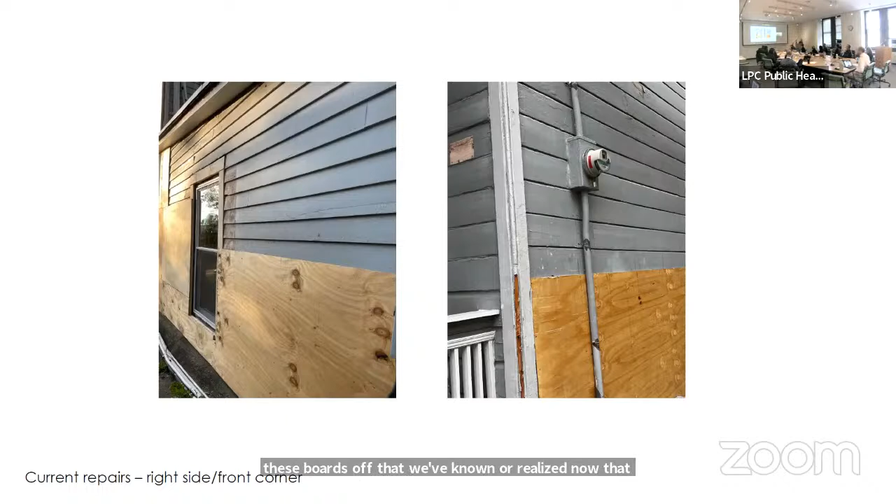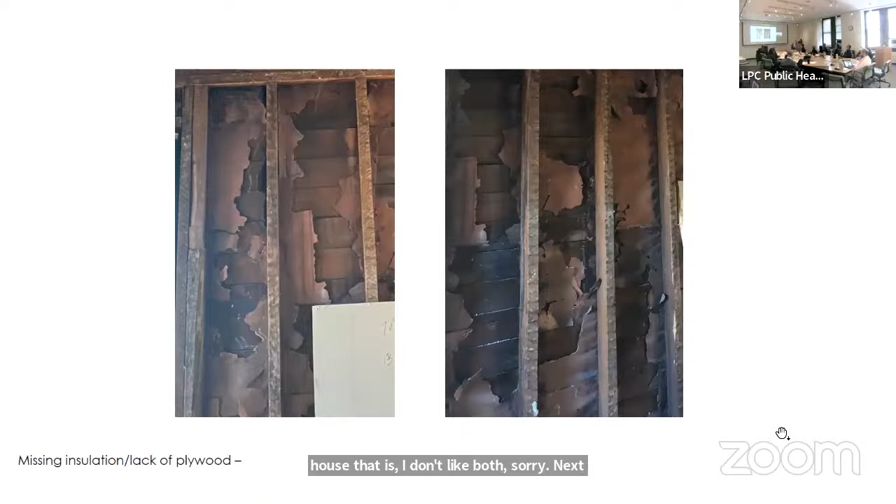Next slide. This is the inside where we had to take off sheetrock and put up more. And this is our insulation, which explains why it costs us $800 a month in the winter to heat our house. It's amazing to me.

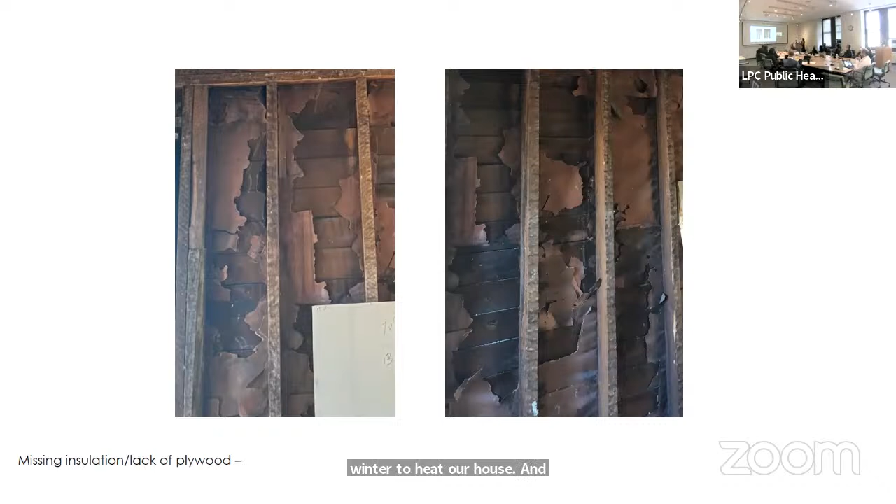I was kind of dumb as to what I was looking at. I didn't realize that is my siding right there. And I guess this really explains why the water just finds its way. It's amazing, in the worst way, I guess.

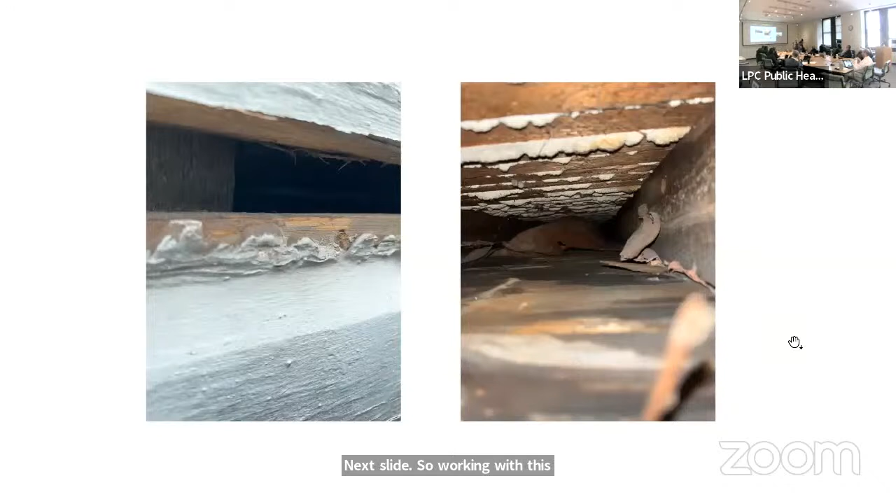Next slide. So working with this contractor - oh yeah, this is pretty cool. Well, not cool, but we pulled a board off and stuck a phone in there, and this is the front of the house too. So that's our plaster and lath up on the 3rd floor, and no insulation or whatever that is to be found. And then the outside of the house, the siding right there.

Next slide. So the contractor has told us, listen, I know you love the house, I know you love the wood, I know in an ideal world this is what you want to do. We've sort of resigned ourselves to the fact that we almost can't afford to take the risk. We bought the house because we love the neighborhood and the look of it, and we don't want to change that as best as we can. We want to keep it looking almost exactly like it does. But the maintenance costs for wood are just more than we can bear, and the risk is now much more frightening since we can't get a warranty on the wood like we can with something like a Hardie Board product.

We presented this to Community Board 1 on Staten Island. They had no objections, they knew the house, they knew the street. They don't want us to pack up and leave, they want us to fix it and stay, and that's what we want too. They did suggest we have an architect come and look, so we hustled to have someone come out. He examined the situation with the plywood, and his letter is attached at the end, but he also gave his assessment that we should probably not do wood just because of the maintenance and the level of cost, and it isn't going to address the issue that the house would then not be insulated and we still have no plywood. So the proposal here, which Abby came out and spoke with our contractor about, we kind of looked through.

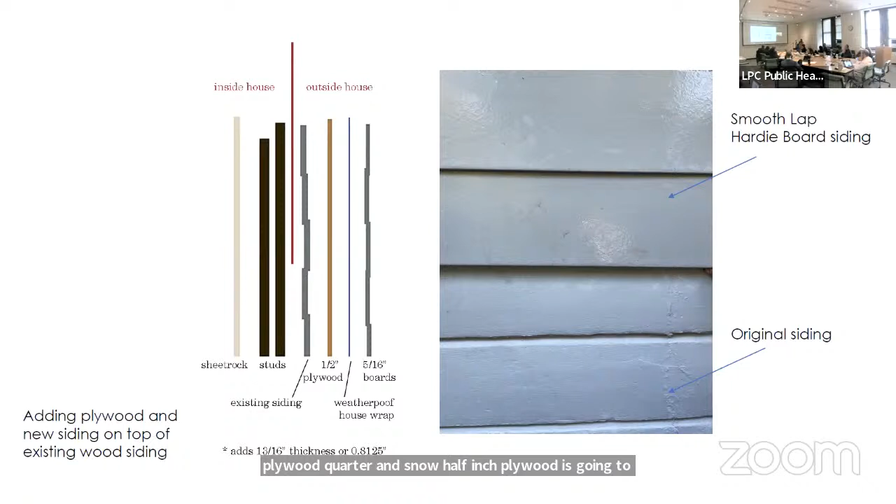So this is sort of the idea here, or our plan and proposal: instead of taking the wood off, which we don't want to do or see in a dumpster, we're going to repurpose it as our insulating layer. The half-inch plywood is going to be attached to the studs through the siding, then the house gets weatherproof house wrap on top, and then the boards go on top of that at 5/16 of an inch. We're adding just under or just over 3/4 of an inch of thickness to the house.

Next slide. So we did some measuring for the boards themselves. The Hardie Board comes in all different widths. Most of ours are the 7-inch exposure, which we think would look really beautiful and traditional for what it is. Some of our boards are 4 inches, and we could mix and match them to achieve that look.

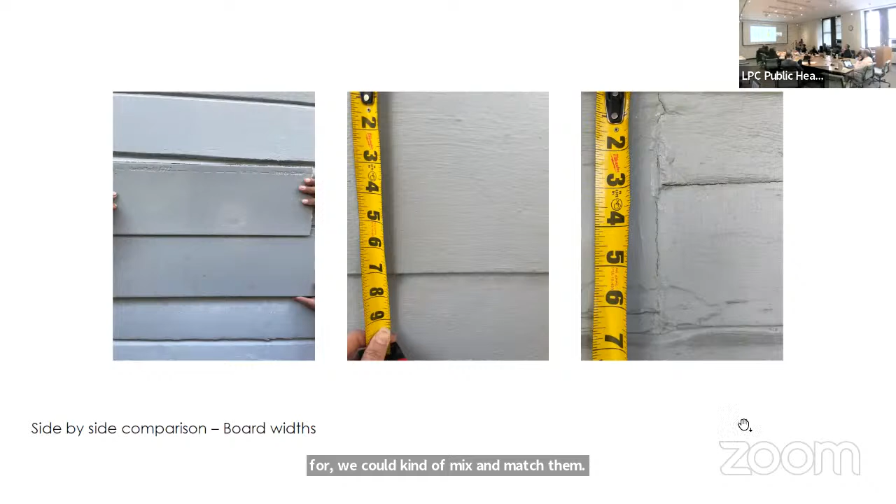Most of our window sills are rotted and have been patched up and aren't even wood anymore. They're just kind of like that pink stuff that comes out of a container and turns white when dry, then gets shaped and repainted. So we'd have to replace all of these with Hardie trim to get their 30-year warranty, which is the peace of mind we need to really be willing to invest in the home and want to stay. We don't want to do something that looks great for 5 or 10 years. We want something that looks great for our lifetime. Next slide.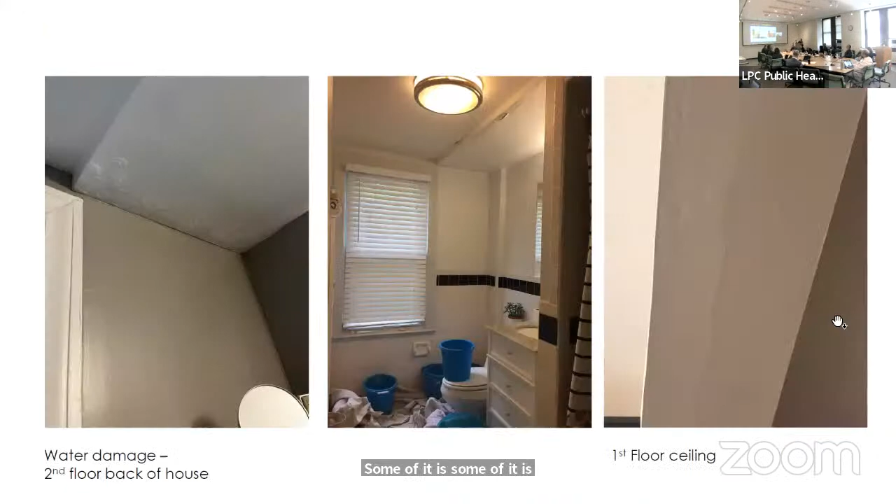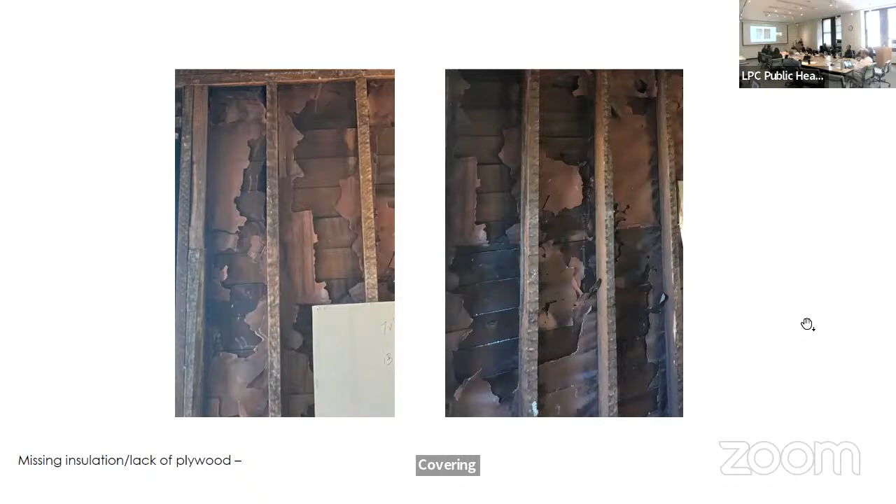So I understand your pain and I have a few questions to look at. What you said, the existing siding, some of it's rotten. Are the studs inside showing signs of rot? No. Okay, because I'm concerned that covering over that existing rotten wood is not a good solution, that it probably needs to be removed, whatever you do.

The other thing is you're not putting in any insulation. We're not, because it's just out of our budget. It's $20,000 to $30,000 to insulate a house, and we're just kind of like, what do we do?

If we have to make a decision for how to move ahead, we've been advised that this is going to be something that can be affordable, and that if it's installed this way, Hardie would honor their warranties, the 30-year warranty and then the 50-year on the paint, or maybe I inverted those. But yeah, in an ideal world, that would be great if I could get a company to do some sort of restoration.

Come in and take everything off and salvage what boards I could, sand them, replace the ones that weren't salvageable, insulate the entire house, put plywood back on the whole house, and then reattach the boards and seal them and paint them. That's just not in the cards for us.

Okay, but also it's a bit out of perspective for the value of the home, right? I paid $490,000 for this house. So if it was this crazy desirable neighborhood and people were coming in and scooping up these homes, yeah, that's probably the type of work that they do.

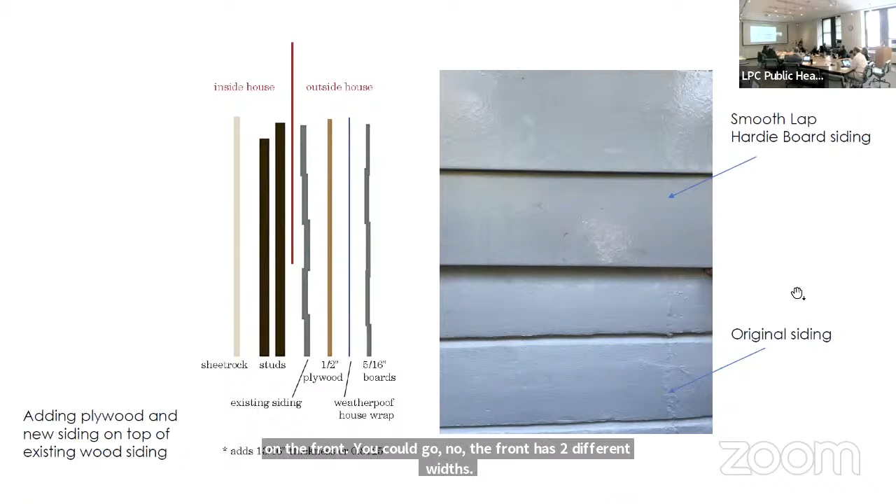And the cornice that you're keeping at the top, the frieze, that's going to be kind of recessed relative to what's below it. Well, it comes out, I think, 1.5 inches. So this, we're just over 3/4 of an inch. So we'll still see the idea of that sort of little shadow that you see now, right there.

So you're going to pay to repair the existing siding, then cover it with plywood, right? Not really, so we're not going to be taking off boards that are degraded, or ones I could just pull off with my hands today. They're going to be taken off and patched, correct, to make it all kind of level. Yes, so that there's a nice level base.

And then also, we realized we have to have a more permanent fix, we can't just keep doing this, we don't have plywood. Our contractor did go back to James Hardie and discuss all of this with them, showed them what they were going to do, and they said they would give their warranties for this type of installation. Got it, thank you. So it's affordable for us. I mean, it's still expensive, but we have saved and borrowed some of the money to get this project done.

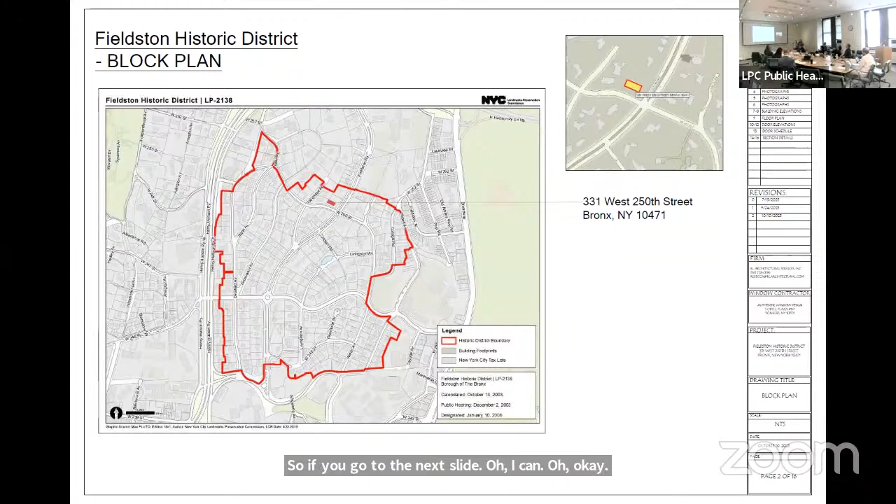So these are photographs of the existing floor within the house, and this sunroom. There's a 4-inch step down that the owners would like to remove. They want to actually lift the floor 4 inches so that it's level and flush with the inside of the house. They want to use this as part of their home, and don't want to have to step down. If you could see in the bottom photograph, the floor that's there now is completely deteriorated. And in the previous photos, you could see that the existing doors are all single pane and they're rotting. There's little to no insulation there.

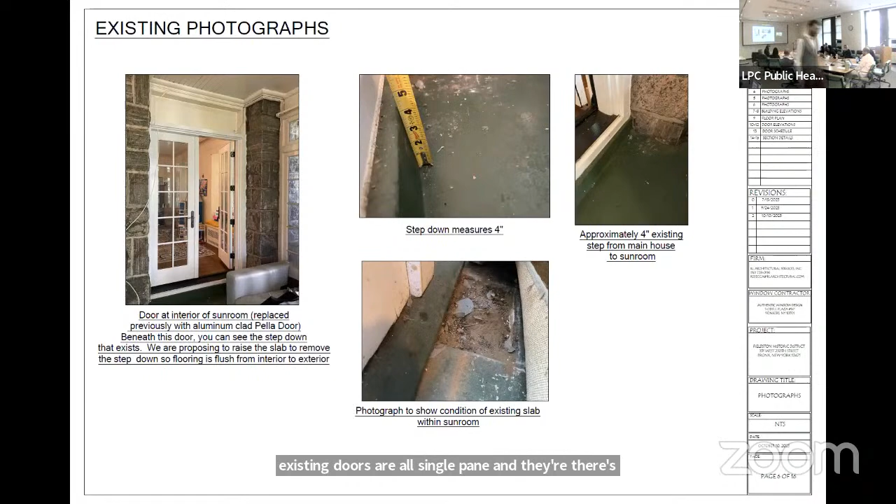So this kind of shows just what the doors look like. And I think it's important to note that all of the windows and the doors on the other part of the house were already replaced, and that was also brought to a hearing. So what we're proposing here is to match the detail, which is an aluminum clad exterior with a wood interior. All of the windows in the house were already replaced with Pella. The doors are proposed to be replaced with Marvin.

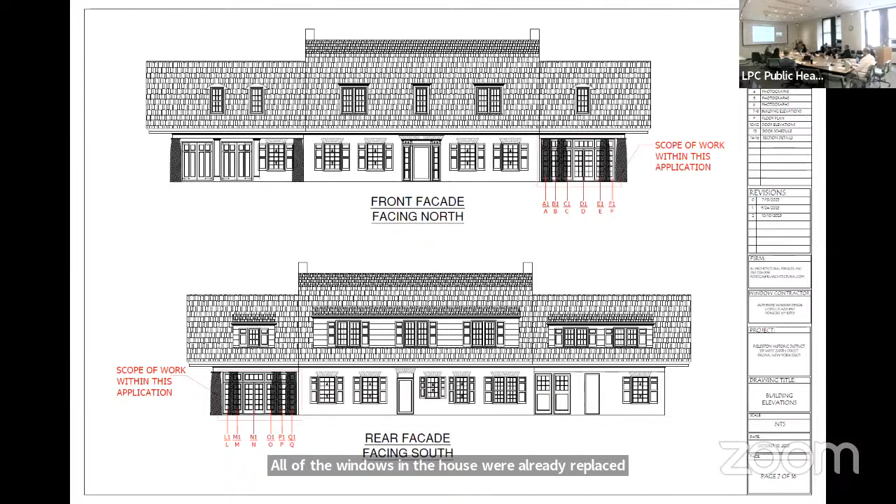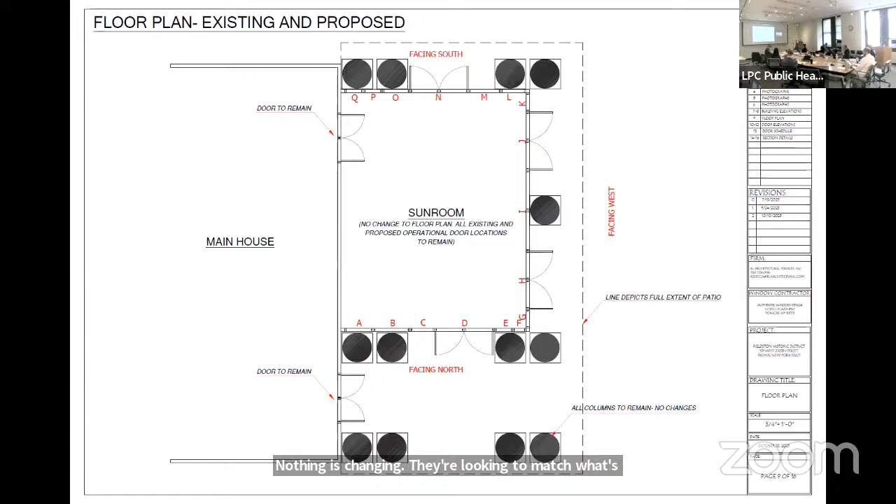This is the other side of the house. So this is the existing floor plan. You can see that the doors swing out and there's a lot of fixed units on this. Everything that we're proposing will match what's there now as far as the floor plan. Nothing is changing. They're looking to match what's there now, just with a different exterior material and a little bit higher up off the floor.

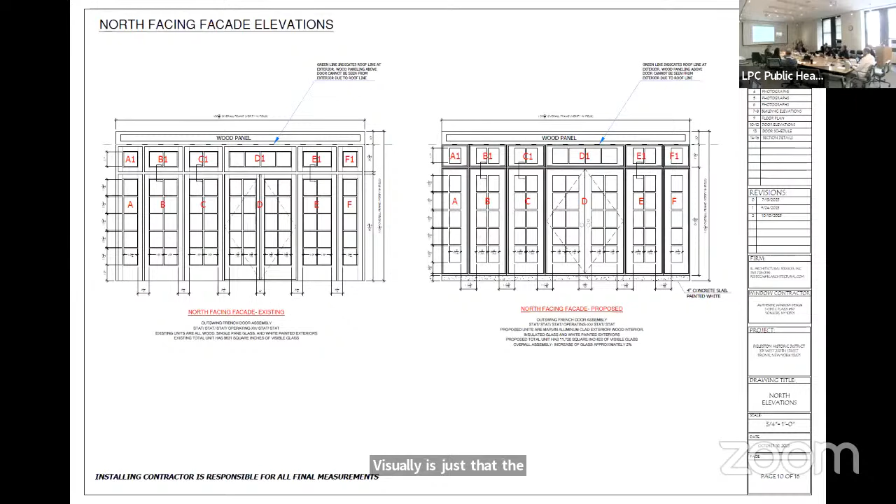So this kind of shows what's existing now and what's being proposed. The main difference visually is just that the floor, when you're raising the floor 4 inches, we're taking that from the bottom rail. So loss of glass is very, very minimal here.

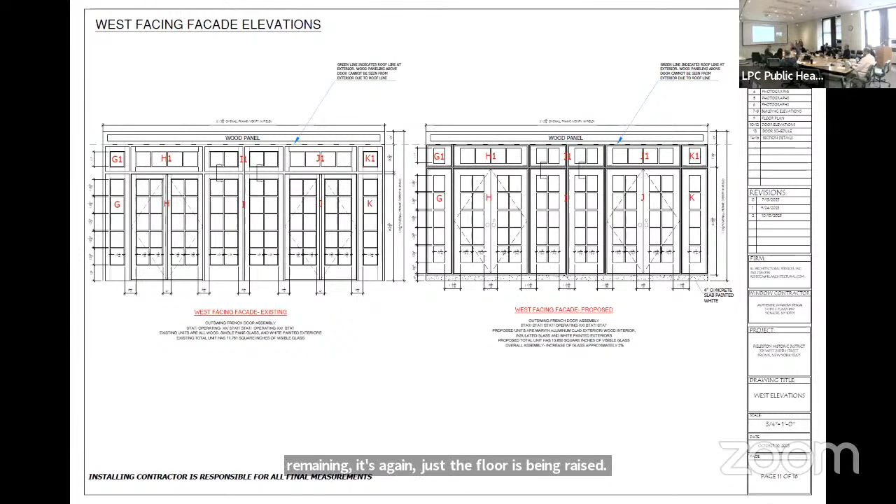Same here on all the doors, existing, proposed, same divided light cuts, same operation. The transoms are remaining. It's again, just the floor is being raised. So you're losing a little bit of that bottom rail.

So this is the window schedule. We're looking to propose a white finish to match what's there now, and the loss of glass is very minimal. These are just the section details. So that really wraps up what we're proposing.

Okay, thank you. Are there any questions? All right, I don't see any questions. And there is no one in the room to testify, so I'll turn it over to Gregory Kala to see if we have any remote participants.

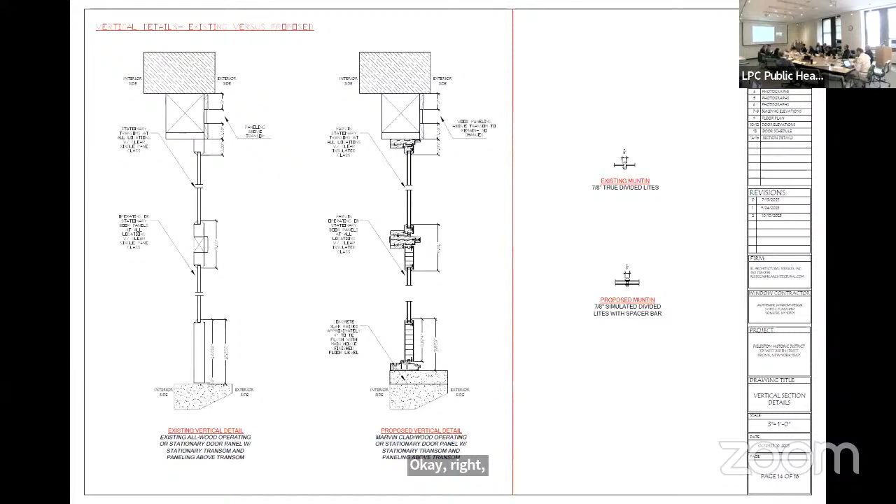Okay, thank you. Would you like to respond to the comments we've heard? Okay, all right, Commissioners, do we have any final questions? Okay, let's move to close the hearing. Vice Chair Bland, would you make a motion to close the hearing? So moved. Commissioner Lutfi, would you second that motion? All in favor, say aye. Aye. Any opposed? Thank you. Okay, so the hearing is now closed and we'll begin our discussion.

I'm going to turn to Commissioner Goldblum, our resident commissioner here. I know this house pretty well. I was actually walking by it the other day and I went up to the front window to look inside because it looks like it's abandoned. It's a mess. And I'm glad to see that they're going to be doing some work on it. It's a beautiful, remarkable, special house, a really unusual one. I think this is totally appropriate. I have no concerns about it. I'm glad they're doing some work. No, it looked like someone was living in the house. So I was reassured.

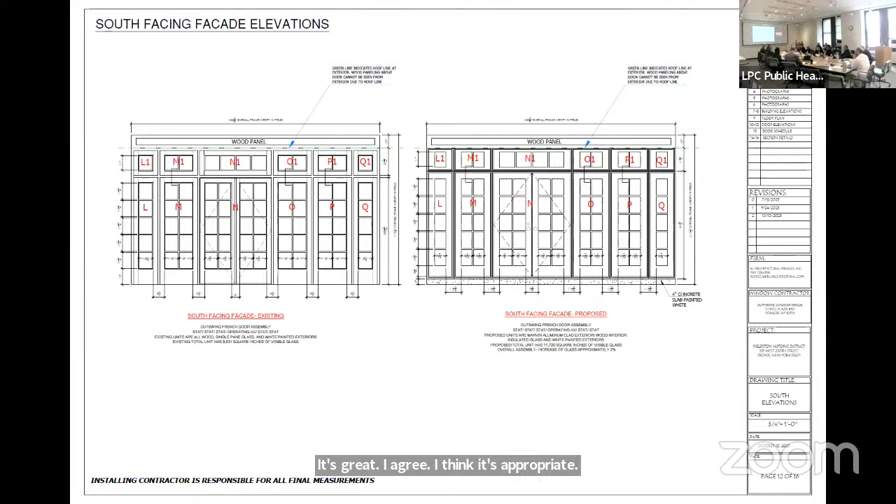Yeah, glad it's going to be improved. It's great. Okay, thank you, Commissioner Holford Smith. I agree. I think it's appropriate. All right, Commissioner Jefferson. Totally appropriate. Okay. Commissioner Master. Appropriate. Okay, Commissioner Chu.

I think it's appropriate. Just one small question, which is there's a beautiful picture of the detail of how the door assembly goes up into reveal to the soffit. Is that retained in the? Thank you. Okay. All right, Commissioner Lutfi.

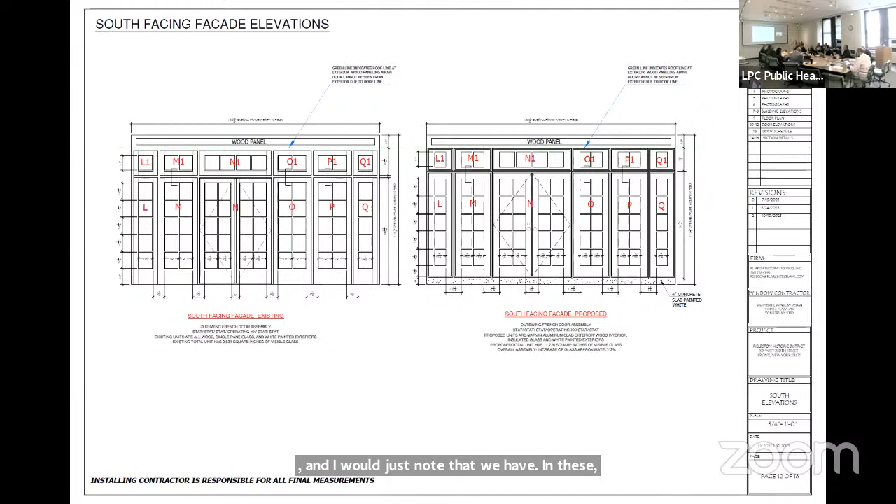Appropriate. Vice Chair Bland. Pass. I think this change is appropriate. Okay. Commissioner Ginsburg. Appropriate. All right. And Commissioner Chapin. Yes, I think it's totally appropriate. Okay. And I would just note that we have in these districts with freestanding houses where the houses are set back far from the street, approved windows in an aluminum clad material, finding that change in material won't be perceptible from the street. And I think the configuration will maintain the spirit of this enclosed porch. So we'll go ahead and approve this.

Commissioner Goldblum, would you make the motion? Sure. Regarding 331 West 250th Street in the Fieldston Historic District, the application is to replace sunroom infill. I note the building style, scale, materials, and details are among the features that contribute to the special architectural and historic character of the Fieldston Historic District. And I recommend approval, finding that the proposed change in materials from painted wood to aluminum clad wood with a baked enamel finish will not be discernible from the street, given the setback siting of the house and the presence of multiple heavy columns, rendering the sun porch infill mainly in shadow, that the details, configurations, and dimensions of the new sunroom enclosure with applied muntin grids and internal spacer bars will be similar to the existing enclosure, that the raising of the floor of the sunroom 4 inches will only have a minor impact on the dimensions of the framing and glazed area, that the new sunroom enclosure will be in keeping with the original and will not detract from the special architectural and historic character of the house or of the Fieldston Historic District.

Thank you. And Commissioner Holford Smith, would you second that motion? I second it. Okay, Mark. Chair Carroll, Aye. Commissioner Bland, Aye. Commissioner Chapin, Aye. Commissioner Chu, Aye. Commissioner Ginsburg, Aye. Commissioner Goldblum, Aye. Commissioner Jefferson, Aye. Commissioner Lutfi, Aye. Commissioner Master, Aye. Commissioner Holford Smith, Aye. With 10 in favor and none opposed, the motion passes. All right, that's approved. Thank you.